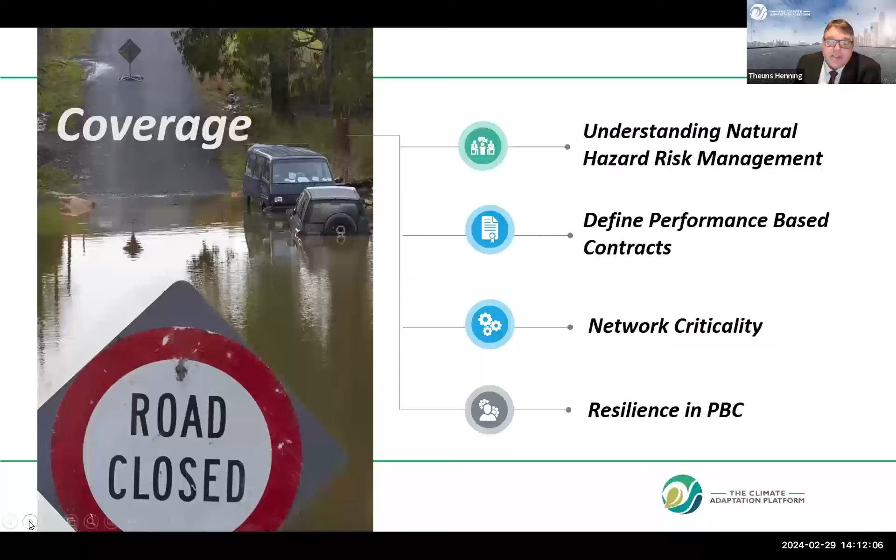Briefly define performance-based contracting. Ian is going to give you more substance in the application with performance-based contracting. I'm going to spend a brief moment on network criticality, given its importance tonight, and then focus quite a bit on how we bring resilience into performance-based contracting.

Our infrastructure in the context of climate resilience fulfills two functions. The first is for our critical infrastructure, the ones we depend on for basic services—we want them to come through storm events or natural hazard events relatively unscathed, so the community can keep on doing what they're doing.

There's also a second type of infrastructure specifically designed and built to protect us against impacts from storm events. A good example is retaining walls and those sort of things. Obviously, in some storm events, those things can fail and sometimes have got catastrophic impacts.

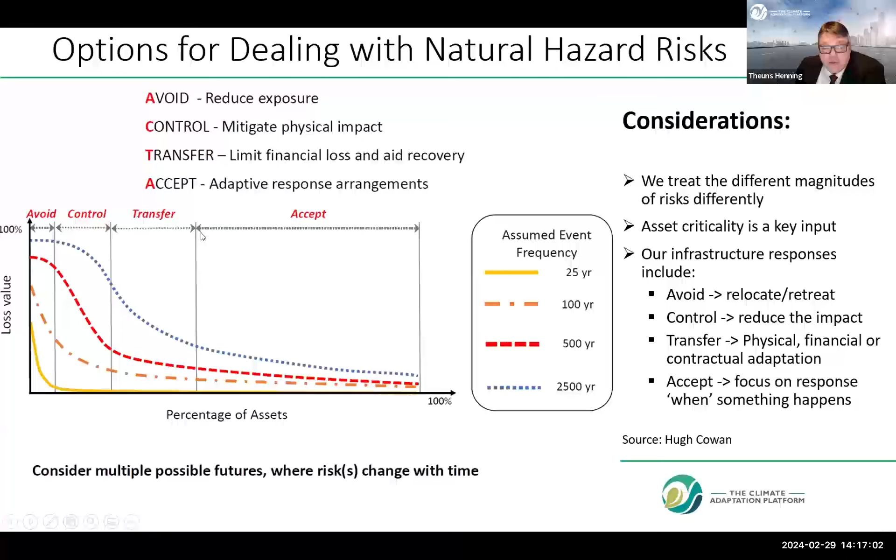Typically, the items with a quite significant return on investment from a climate perspective, we will invest money in that, and the other ones we'll perhaps look at transferring that risk. Most of what I'm going to talk about tonight will cover these two, with a strong focus on the risk that we transfer in a performance-based contract.

In any situation when we do investment planning, in particular constrained investment, which most of us is under, I haven't come across any road agency in the world that says we've got too much money or enough money. Most of us is short of cash. So what we need to do with the little bit of money we get is maximize the outcome, maximized across three areas as a minimum: the best return to our customers and our community.

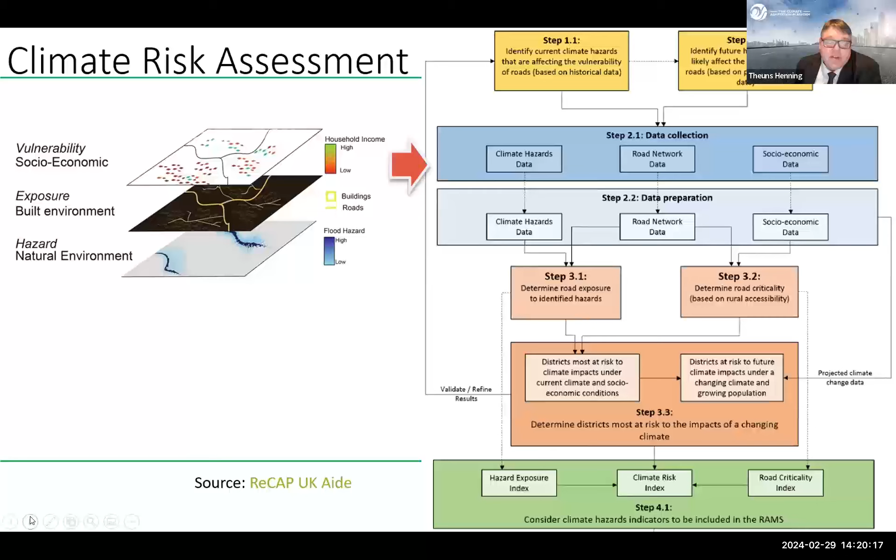We do the analytics to understand the hazard exposure and road criticality, and from that process we end up with an understanding of the risk index and the road criticality. From that point onwards, we can do the planning. At the start of any contract, or at the start of doing climate adaptation in any region, you need to go through this process. So it is quite universal.

Quickly on performance-based contracting, and as I said, Ian will go into this in a bit more detail. Let's start from this end. With traditional contracts, you tell the contractor what work to go and do. They execute the work, and as a consequence the roads may be in a certain condition, and because of that condition, your customer is going to feel or experience the road in a certain way - it may be smooth, it may be rough, and they may complain about it.

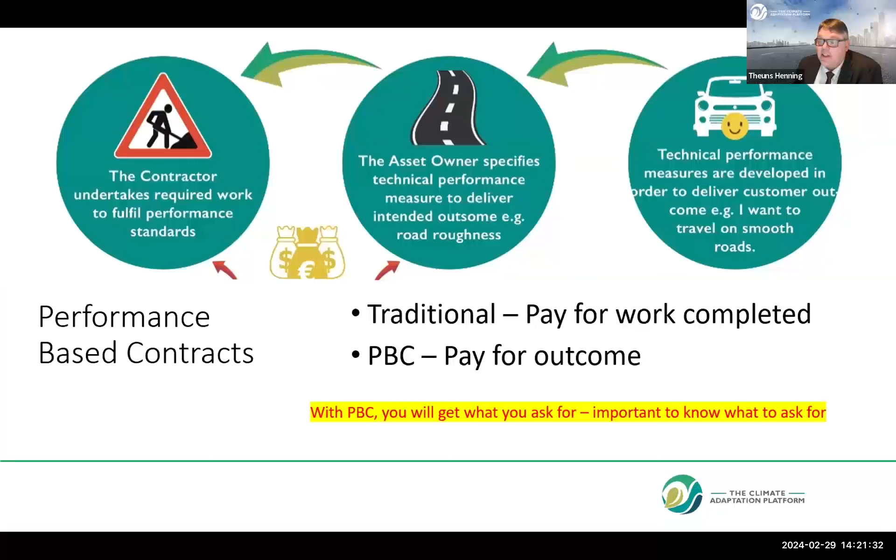With performance-based contracting, we go the opposite way. We first decide what do I want to give my customer in terms of performance level, and through that we specify what the road condition and situation need to be. Then we give it to the contractor and they decide how they're going to achieve that. The big difference is with traditional contracts, we pay for the work completed; with performance-based contracting, we pay for the outcome. The biggest advantage of performance-based contracting is you get what you ask for, and one of the biggest limitations is you get what you ask for. So the bottom line is make sure you know what to ask for in the first place.

I said I would talk about the 3 R's in resilience: robustness, which is pre-event, readiness, and resourcefulness, and then how we respond. All of this makes up how resilient a system is. Tonight you're going to hear mostly about resilience in the physical asset space - the resilience of the road network. But keep in mind, we also need to look at the resilience of a community, and the resilience of an organization to respond to events. Tonight we're talking infrastructure, and also the types of impacts.

In tonight's talk, we covered both the gradual changes in climate, so it's getting wetter over time, hotter over time, drier over time. We also talk about shock events, all natural hazards, so that includes earthquakes and weather events. And then obviously we get this bit in the middle that we have to deal with on our road networks.

So framing up the performance-based contracting, I think one of the most important steps, and even if your performance-based contracting doesn't go ahead, this planning and preparation part is perhaps the most important, because it makes you think what your network needs, particularly for resilience. So we will have a performance-based consultant that will do this preparation work for us, release the tender, and then the contractor comes on board.

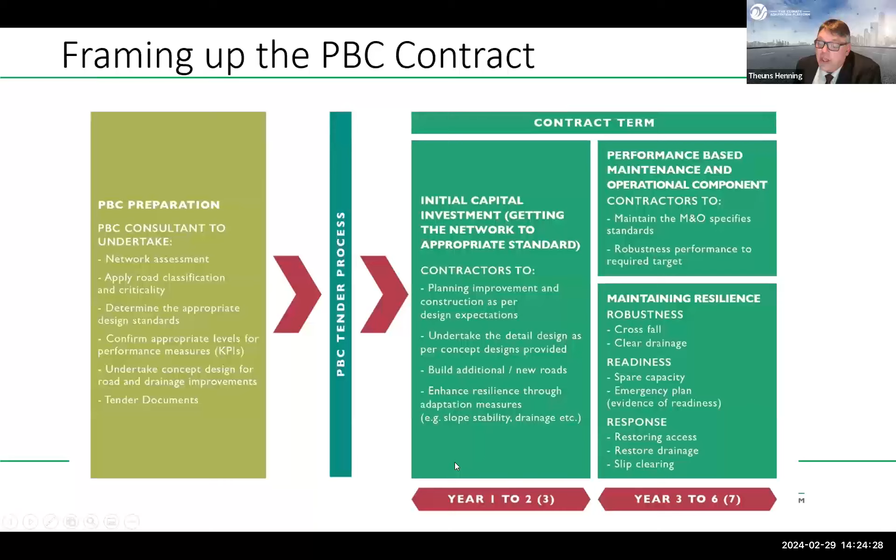There's ways to describe robustness, and I'm probably going to focus mostly on that. But there's also the elements of spare capacity. Perhaps if you've got a large unsealed road network, you need a few extra graders or access to a few extra graders in dealing with an emergency. And then, of course, all the response and rebuilding following an event.

So this is how we do it, and this is the whole concept. Now, I must give credit to Ian Greenwood, we have developed this framework. Ian, I cannot remember if it was over a bowl of salad or over a beer - maybe because we're both not vegetarian, it was the latter - but in any case, I have spoken about the 2 components in performance-based contracting, the design and construction, and then the maintenance and operate.

Now, when we bring in the resilience aspect, the whole risk element comes in. And there's a principle in performance-based contracting that you want to give some risk to the contractor, but not too much, because then you're going to start paying for them carrying excessive risk. So you've got to have a balanced position of risk sharing between the asset owner and the contractor.

So it's quite easy if the event is within the risk envelope specified for the contract. The contractor is responsible for all the repairs, except if there's damage due to extraordinary circumstances. And there's always some of those that you also have to recognize.

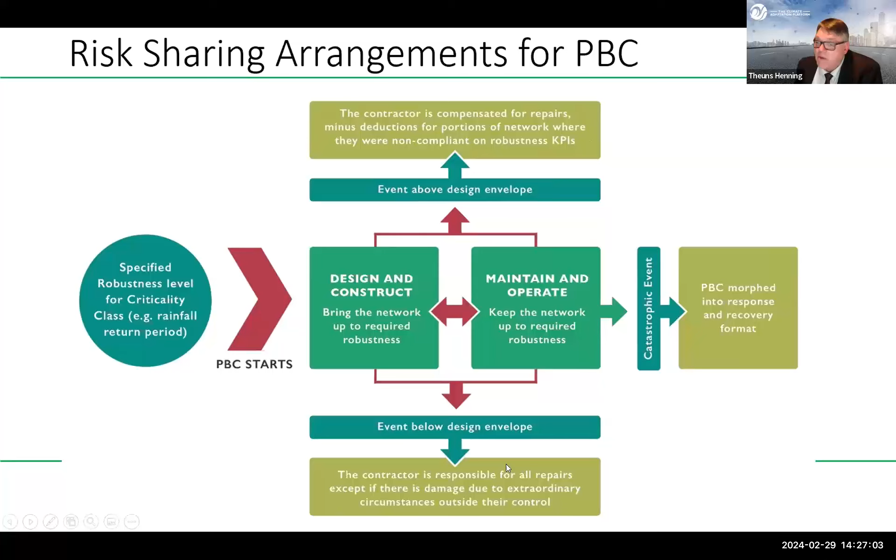And then the catastrophic events, when everything is up in the air and basically the contract disappears into the ether, there is the opportunity of using the contractor while they're on site and then morph the contract into a rebuild contract rather than a maintenance contract. So we've got very good examples out of New Zealand on that. I think Elke might touch on some of those.

For me, in the development of this concept, the hardest bit was perhaps to specify the cut-off points and criteria for when a storm is a certain size. I think, like anybody else, I gravitated towards a return period until I realized how difficult specification around return periods is, because return periods don't always quantify the ability of a storm to cause damage. It depends on where the eye of the storm is, the catchment characteristics, and all of those things. So with my hydrology colleagues, we came up with a process of saying you've only got to specify boundaries in terms of things you can measure.

You can measure temperature, ambient temperature, road temperature, rainfall. And for the downflow areas, you can install basically a flow depth meter in critical positions in the network, and you can quantify that storm intensity quite beautifully.

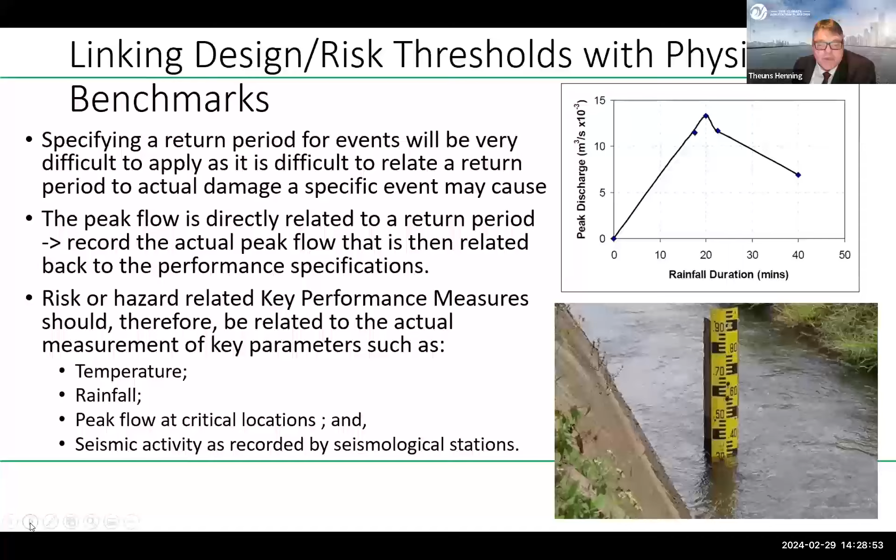About 5 minutes there, Theuns. How long? About 5, 5 minutes, I will make it.

Then road classification, quite important to take functional and hierarchical road classification, where we've got motorways on one side, free-flowing, limited access, to local roads, and we bring in the criticality lens. Now just two concepts.

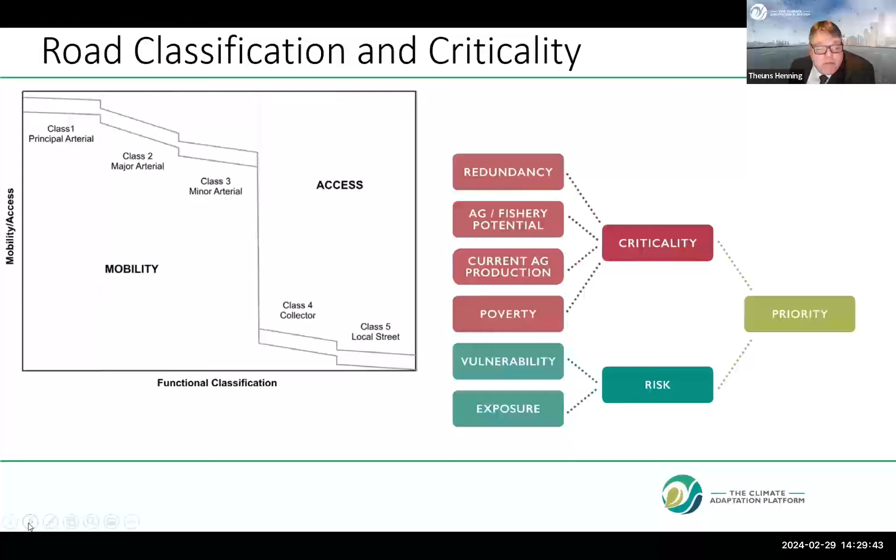Criticality talks about what the issue is that we try to prevent, so it's the downstream impacts. Climate risk is the vulnerability or fragility of the infrastructure and how exposed it is. Now those two give us the priority, so criticality is very important in planning network resilience investment.

There's an example of typical road criticalities that you can define, with a description. We've got the low impact criticality road network on this side, where we'll do very little to no additional resilience requirements, versus the supercritical stuff, where we've actually got to focus quite a bit on the resilience.

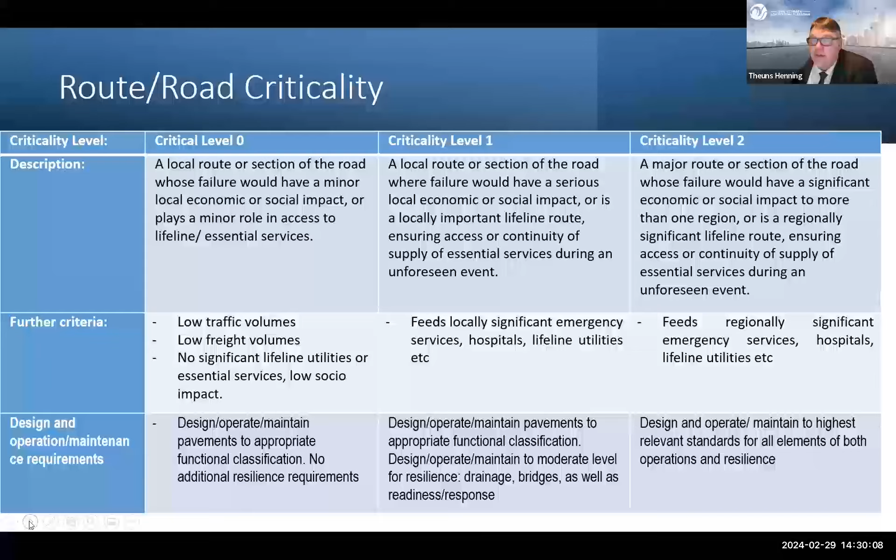You also need to understand, before you go into the contract, what can go wrong, and what you should do about it, because ultimately these are the things you want to incentivize the contractor to do. So you want to understand that before you'll be able to define performance specifications.

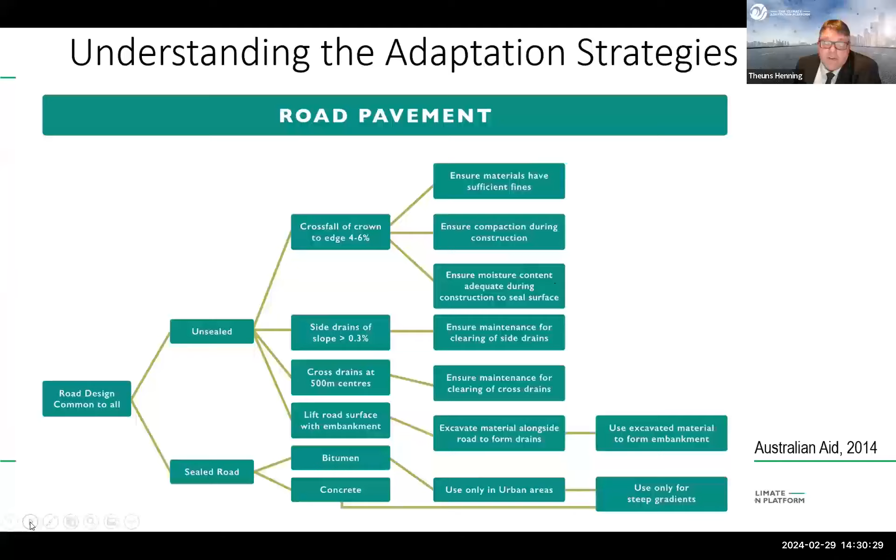And here's a good example of performance specifications. We look at the weather impact, we see what it can do to our roads and related infrastructure, and then what do we need to do in terms of our contract? What sort of behavior do we want to encourage? Ian has got a classical one-liner that he will talk about in ensuring there's routine maintenance always taking place.

I will leave it to Ian and not steal his thunder.

Here are some examples of performance measures, both operational performance measures and key performance measures that we can use in the resilience space. For example, with bridge structures, we want to make sure it's structurally sound, hydraulically functioning well, there's got to be no debris, and also limit the defects over time with conditions.

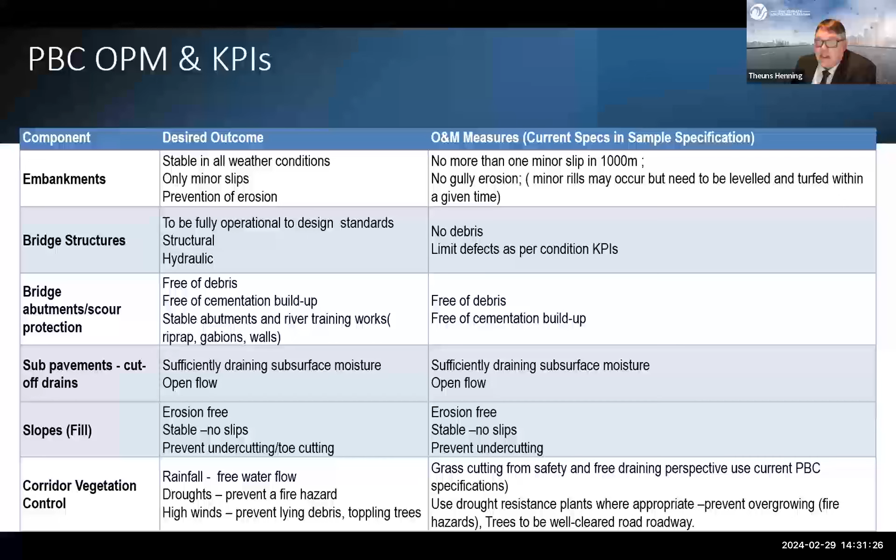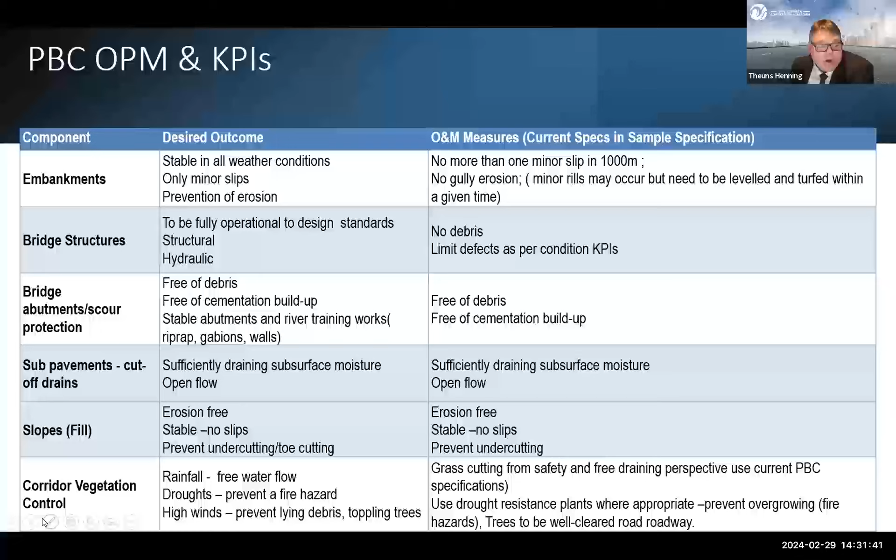Just a side note on bridges, also make sure upstream, and especially in forestry areas, Elke will show you some devastating damage that happens once the timber washes down and blocks the bridge flow paths.

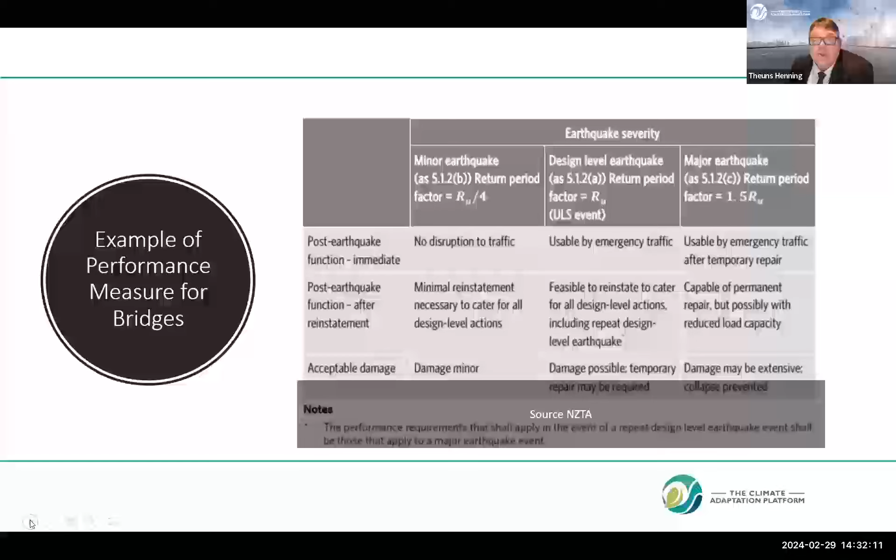Just in conclusion, my key messages: we always think that resilience is too expensive. I disagree with that. I think you cannot afford not to do resilience. There's a lot of low-hanging fruit, routine maintenance being one of them. Performance-based contracts can be a very effective vehicle for adopting good asset management and good resilient asset management.

Points to remember: target your investment decisions, and it must be balanced in what we want to agree on. Risk transfer needs to be considered, which is going to be the risk that the contractor carries, typically the party that manages the risk. Blanket risk transfer is very costly, and then have clear KPIs and OPM measures. And always think, what are you going to do about the things you haven't thought about?

So those blind spots, and they will always be there. Believe me, every storm event that I've experienced had some of those unexpected outcomes. So you need to also think about how you will deal with those in the contract.

I'm going to take questions later. At this point, I'm going to hand over to my colleague, Elke Beca. Elke is originally from Wyoming, in the United States. Fortunately, she came to New Zealand with her parents, and she did engineering science at the university where I'm teaching, and has made a remarkable impact on asset management in this country. Elke, it gives me pleasure to hand the floor over to you.

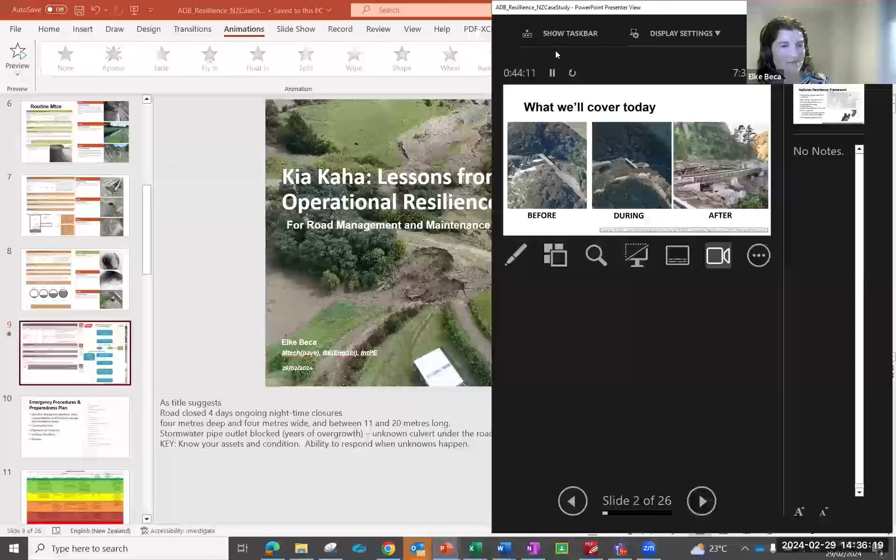So today, can I just check, is my screen sharing? Not yet. You haven't shown it yet. Okay, apologies for that, forgot to click the little last button. There we go, is that better? We've got your presenter screen on it rather than the presentation. So if you go up to that display settings, I think you can switch. There we go, is that better? Perfect, lovely, excellent. Okay, apologies for that.

Okay, so today, covering off again at an operational level, looking at before, during, and after, and aspects that we can take on the ground to help make our networks more resilient.

This is an example from Cyclone Gabrielle, which devastated the New Zealand North Island East Coast just about a year ago this last week, showing our nice network beforehand. This bridge, the Arapanui Bridge, a lifeline route between two fairly significant communities of Napier City and Gisborne, was entirely wiped away. And then after, the reinstatement of a Bailey Bridge as an interim response to our final rebuild.

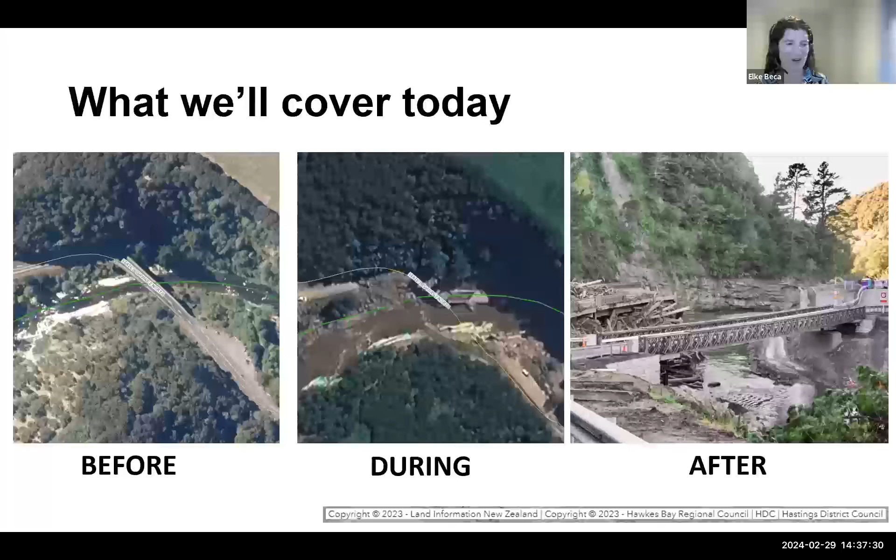So with those three lenses in mind, I'd like to start at the top. Theuns has largely covered off this space of how do we prepare ourselves for resilient events.

A tiny bit of context before I jump in, given I will be talking in a New Zealand context. In New Zealand, our road networks are owned and funded through our central government and local governments, so we have very limited private funding on our roads. We have an overarching agency called Waka Kotahi, New Zealand Transport Agency, who own and are the stewards of what's called our state highway network, which carries about 50% of our general traffic. The other 50% is carried by what are called local roads. So in this presentation, I'm really talking to our state highway networks and the approach of Waka Kotahi, but I'd like to hope these principles and examples are applicable right across New Zealand, and hopefully for many of you, have some bearing as well.

So we do have a national resilience framework in place, and it has been developed along the principles that Theuns stepped through, really focusing on those high impact, low frequency events.

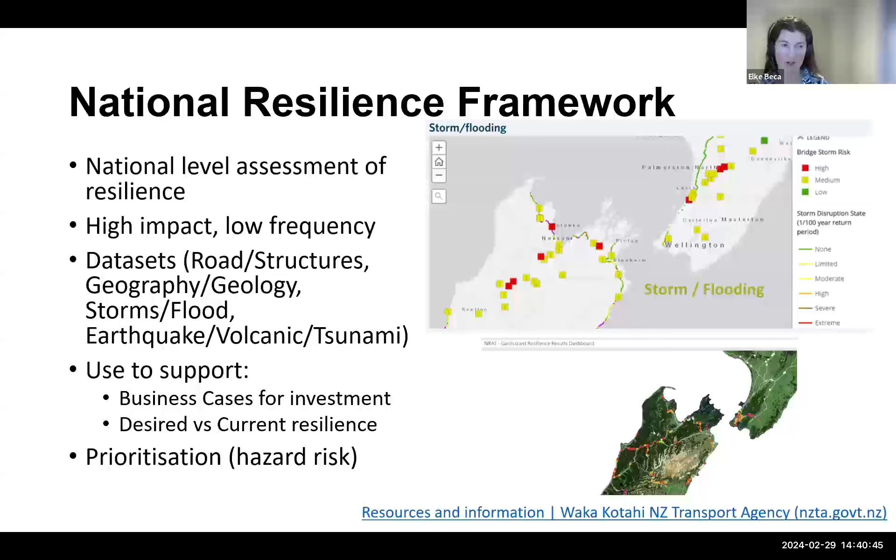So we've arrived in a fairly good position now across the state highway network that we can understand where our improvement money can be spent. But renewing existing assets or building new assets with more resilience can be prohibitively expensive. We all know there's a limited amount of funding, and there is absolutely a funding gap between what we would like to do and what we can actually afford in eliminating the hazards.

As a result, engineering controls such as this example, the trigger action response plan, are used to give us a more cost-effective temporary alternative to actually investing in renewing or new infrastructure.

So what the TARP is, is a plan identifying the trigger, which again Theuns has indicated in his presentation, which talks to the level of risk that we can take, the actions, so the steps taken before and during an event to address that risk, and the response, so what happens following the event to bring the infrastructure back to an acceptable level of risk.

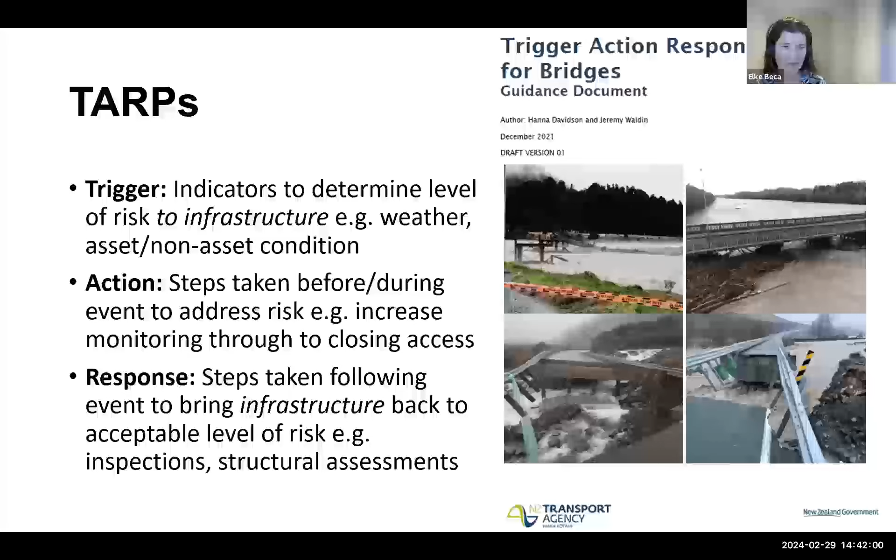So looking at a TARP on the ground, this is an example for a river flow rate. Similar to Theuns' example, looking at the flow through the river, identifying different statuses or kind of traffic light colors, so that the teams on the ground have a detailed description of how to respond as an event is approaching - in this example, a rainfall event. So we can understand at different flow rates what action needs to be taken.

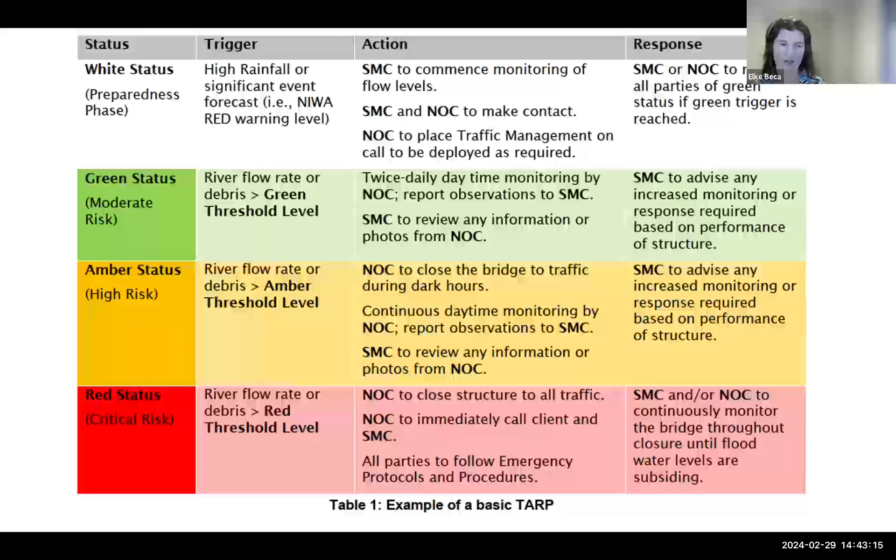There are lots of acronyms on this chart, so apologies for that, but they relate to different parties involved in the maintenance and management of the network. So there's a very clear description of at what point in time, what trigger, what action needs to be taken, who needs to be informed, and what the response is following that event, so that we've got a documented process to help inform how we deal with events as they arrive and start to impact our networks.

So moving a little bit more into that routine maintenance space and actions we take at a local operational level, this is an example out of our network contracts, which are rolled out right across our state highway network. Theuns also spoke to the importance of operational performance measures, so getting out and ensuring that regular maintenance is undertaken.

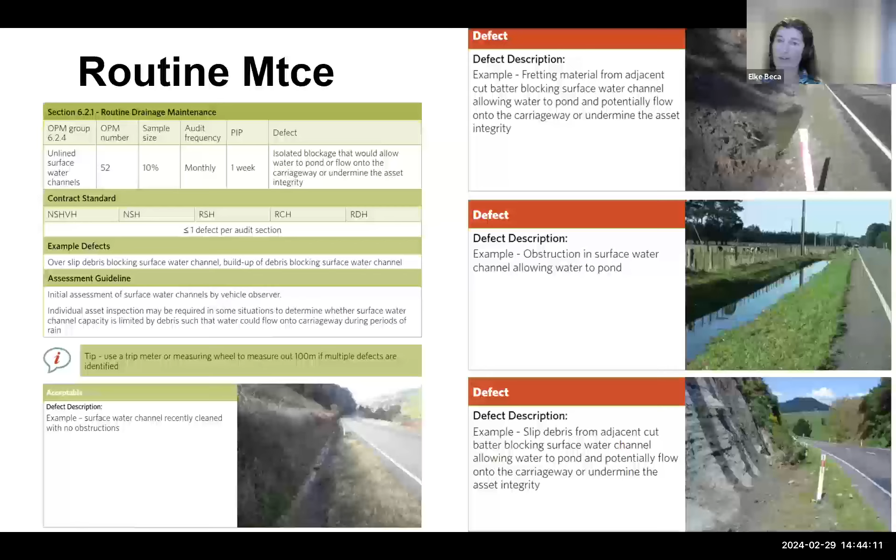So across our networks, we do have operational measures relating to our drainage infrastructure to ensure that they're inspected and cleared in a regular manner. These are just a couple of examples - this is looking at our side, our unlined water channels, of which we have a monthly audit frequency to ensure that they're cleared and cleaned.

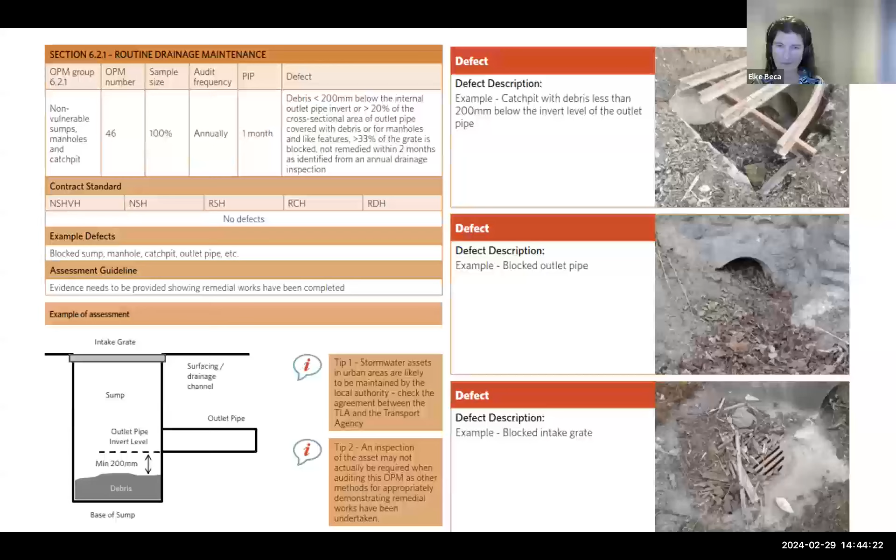Sumps, manholes and catch pits on an annual basis. Our culverts as well - whilst we do have a continual cycle going around our network, the expectation across our state highway network is that on an annual basis, every single culvert will have been inspected and cleared to the level of service required.

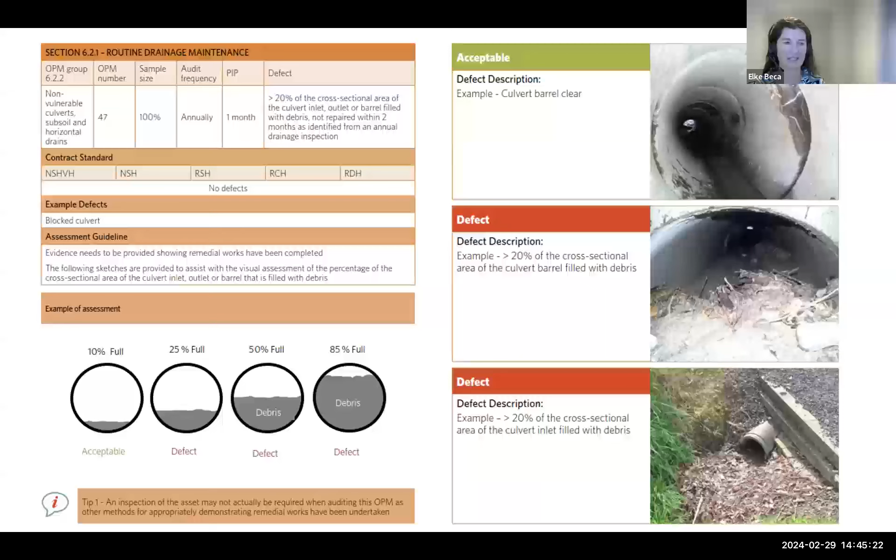And I guess, as we all know, there's no guarantee that just because a bit of infrastructure like a culvert has been cleared, it's not going to be blocked the next day. But knowing that it at least has been identified, located, and action has been taken is really important to have embedded in your contracts. It's astounding, even in New Zealand, with the data that we have available, the number of bits of infrastructure like culverts that we are still finding on our network that we weren't previously aware of. So data becomes really, really essential.

And finally, the criticality aspect.

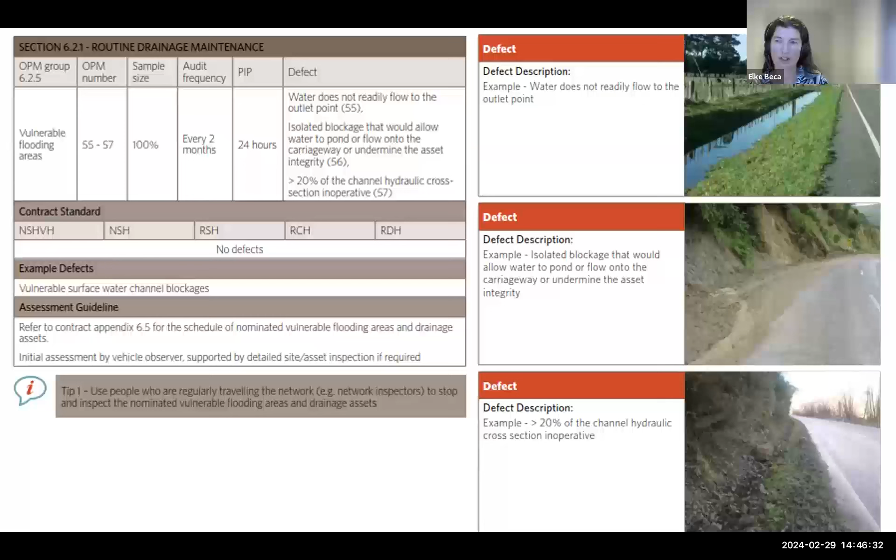Through our prioritization of understanding our network, we can pinpoint where our vulnerable assets are, and on those vulnerable assets implement a more rigorous inspection regime. In vulnerable areas with vulnerable infrastructure, we have a much more rigorous response and also lean on the trigger action plan, so when an event is coming there's an action in place to get out and inspect those vulnerable bits of infrastructure in advance, where we have time. That means in the areas we know are most vulnerable and most likely to be impacted, we can advance or speed up the typical routine maintenance that would otherwise occur, ensuring the best bang for buck and best opportunity to keep our networks open and resilient.

This diagram on the right-hand side is part of the emergency procedures and preparedness process for our vulnerable flood sites.

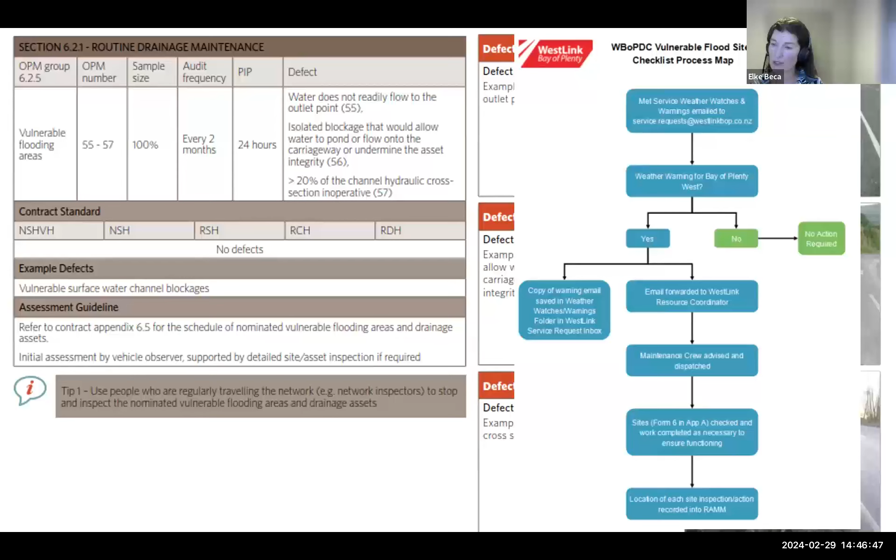Stepping into that next space, a very key document when we get to managing events and post-event is having a plan in place that identifies who is involved, what their roles and responsibilities are, so the operational team can effectively manage events as they come on board. It talks to the communications, the operational processes, checklists. The preparedness plan has detour maps in place so that we have a concise plan with all of the key information for the range of events that may hit our network, ensuring consistency at an operational level in how we deal with events.

This has been a really key improvement we've seen across our networks over the last few years, getting consistency in how we respond to events and hazards.

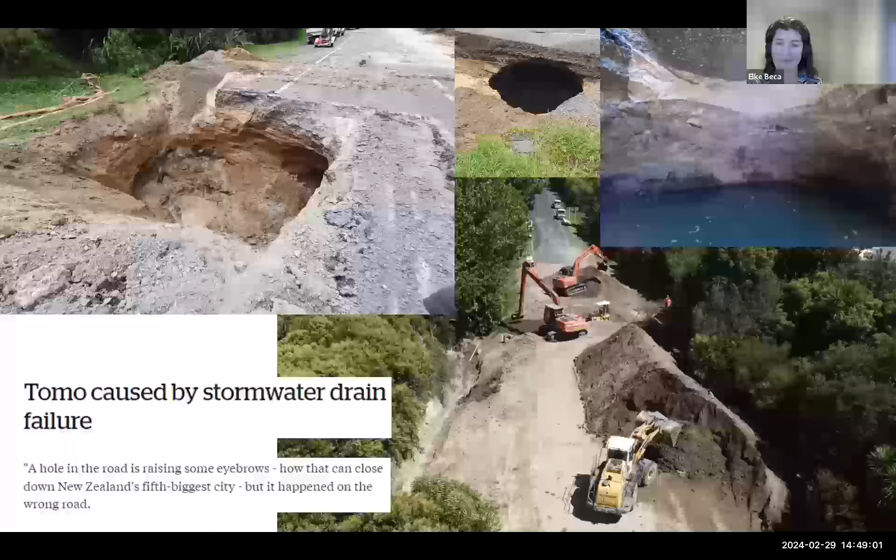The EPP plan is a really key document that all networks should have in place to document the emergency response process. This is an example close to home here in Tauranga, a network that services our fifth largest city in New Zealand.

Unexpectedly, this happened literally a couple of weeks ago. A little hole on the side of the road appeared, and what was discovered was a tomo - an entire cavern filled with water right across the breadth of the road.

The key takeaway was that despite all the measures we have in place and the management and maintenance we carry out on the network, there was a culvert under this bit of road, and also a stormwater pipe from the utility sector that had ruptured and over the years had just carved out a cavern, which unbeknownst to the traveling public left merely a 200 mil bit of asphalt over top of an entire cavern.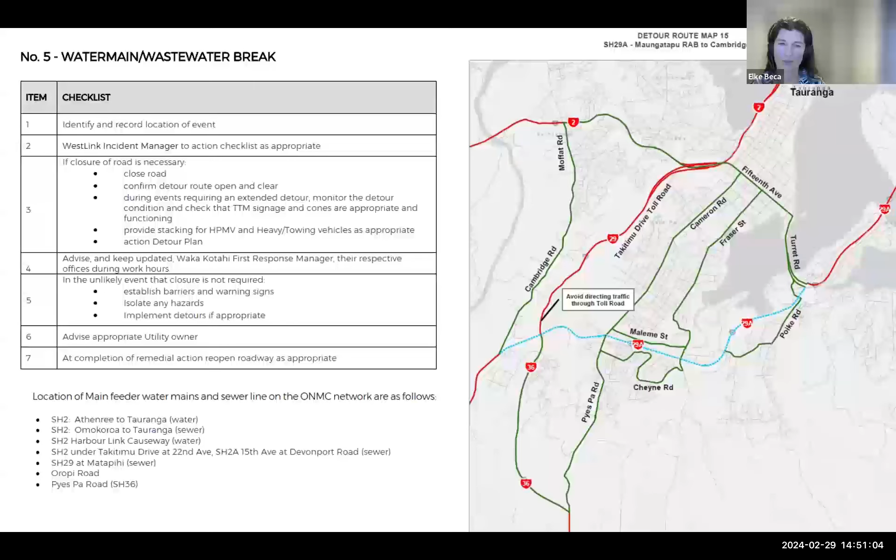What was fantastic with the response, once this was identified, was the clear ability to close the road, get detours in place, and have contractors on site, with resources identified in terms of material sourcing and remedial action through the plans that were stood up. For something that could have been absolutely catastrophic, the response and turnaround was exceptional. The communication to the public was well carried out, which made what could have been a catastrophe turn into quite a straightforward process - there was a five-day closure. This is an example snapped out of our emergency preparedness plan that was put directly into action as soon as that incident was identified.

Another case. Five minutes, yeah.

Okay, great. Another case study was around a cyclone which hit just prior to Cyclone Gabrielle and took out the road network to one of our beach communities. This case study really emphasized the importance of having access to local resources in an emergency event, and having contracts in place that enable quick and well thought through responses without having to go through significant procurement to get action underway.

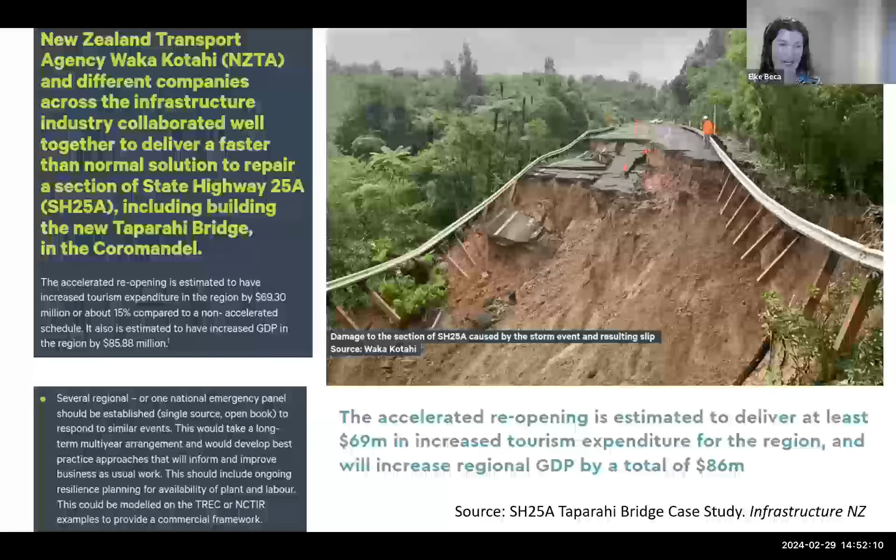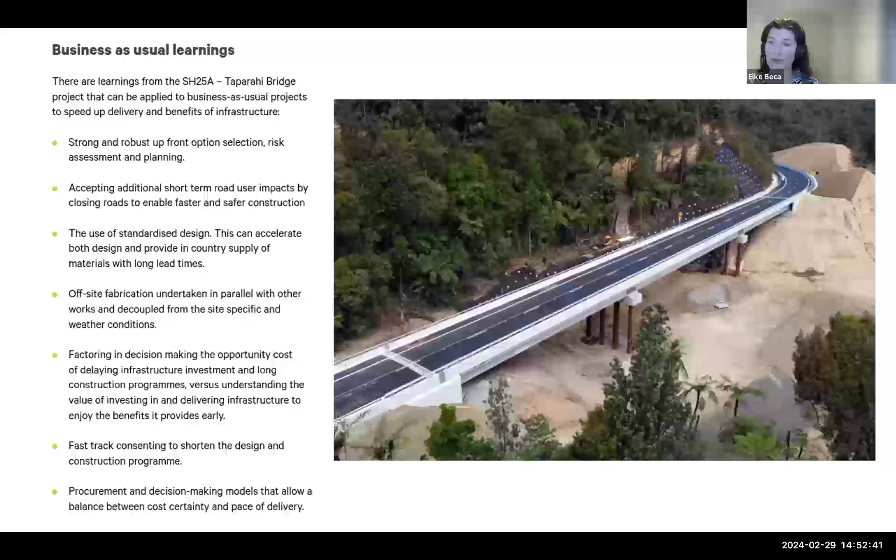What was pegged to be a 3-year repair was able to be delivered in less than a year, saving significant money and pain for the traveling public. One of the key learnings: fast tracking of consenting to shorten design and construction, parallel construction of the infrastructure alongside the design, using standardized design, and ensuring access to local materials to advance the response.

And the final piece is looking at our Cyclone Gabrielle.

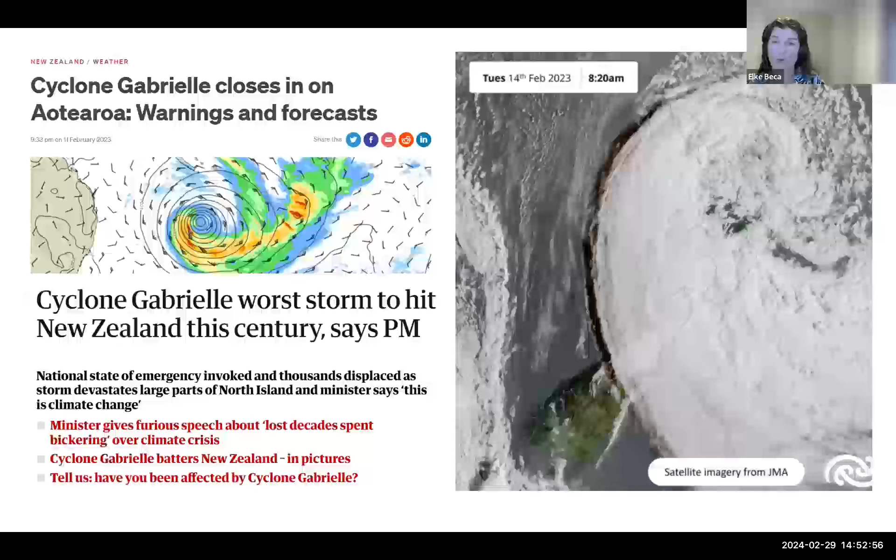So almost a year ago today, Cyclone Gabrielle hit, which was pitched as the worst storm to hit New Zealand this century.

This was a level 5 national state emergency that has only been declared 3 times in New Zealand. Rainfall was well beyond the forecast and previous recordings, with over 400 millimeters in some catchments, with winds over 130 kilometers.

Stop banks were breached in 22 locations. The heavy rainfall caused extreme flows and a number of bridge failures right across the network.

In total, we had 30 bridges collapse, most which needed a complete rebuild. 25 bridges had significant damage or their approaches were washed out, and 86 bridges had moderate damage, impacting traffic to some degree.

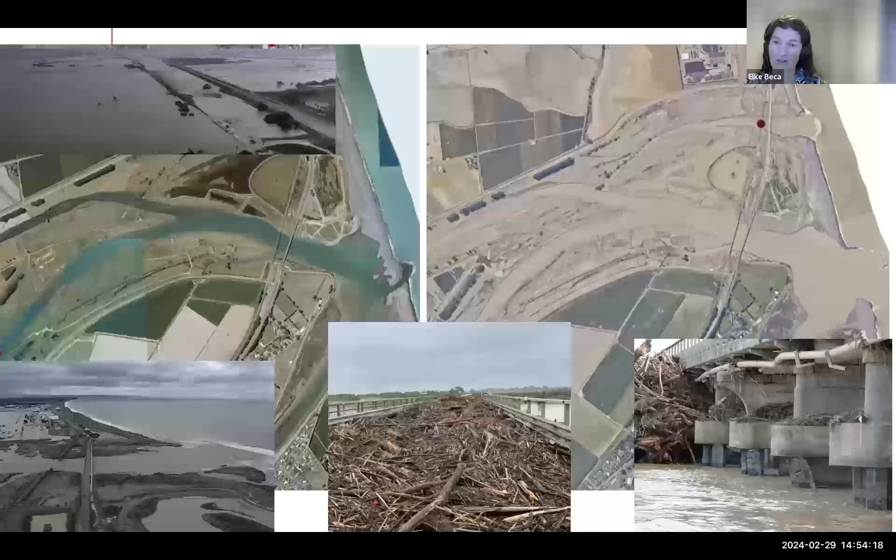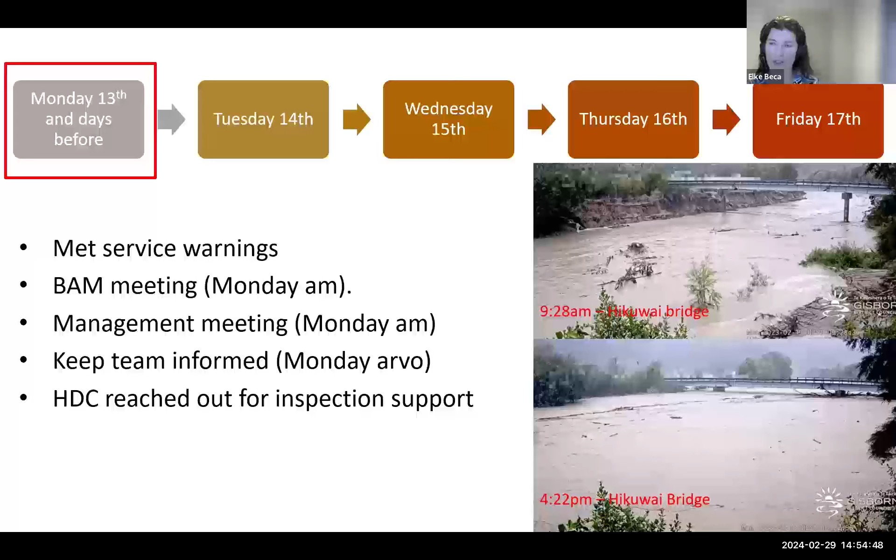So just stepping through the on-the-ground response, I guess what was really challenging with this event was it wasn't picked to hit this area, and there was minimal warning. The cyclone was coming, but it wasn't meant to be significant across the Hawke's Bay.

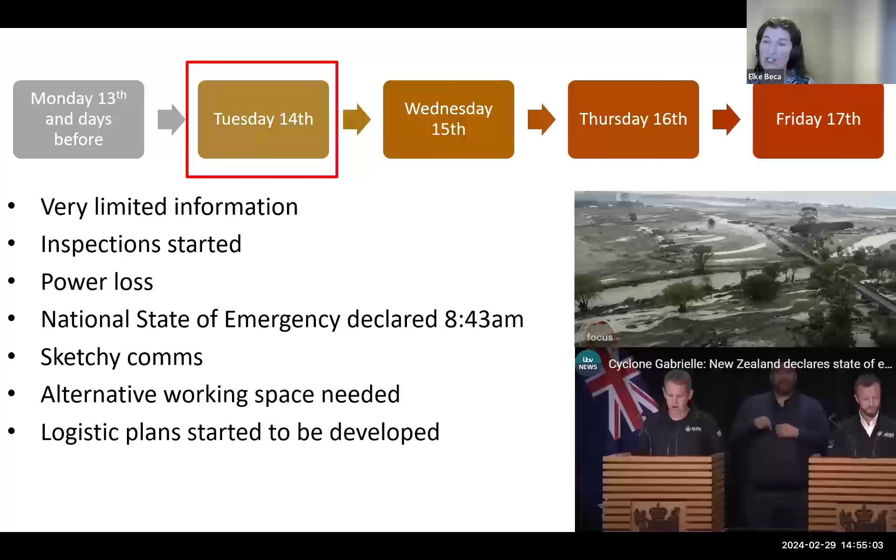When the event hit overnight, there was power loss, limited information, a national state of emergency was declared, and basically the emergency response team needed to pull together and make a plan. By day 2, the team had been pulled together and clear roles established.

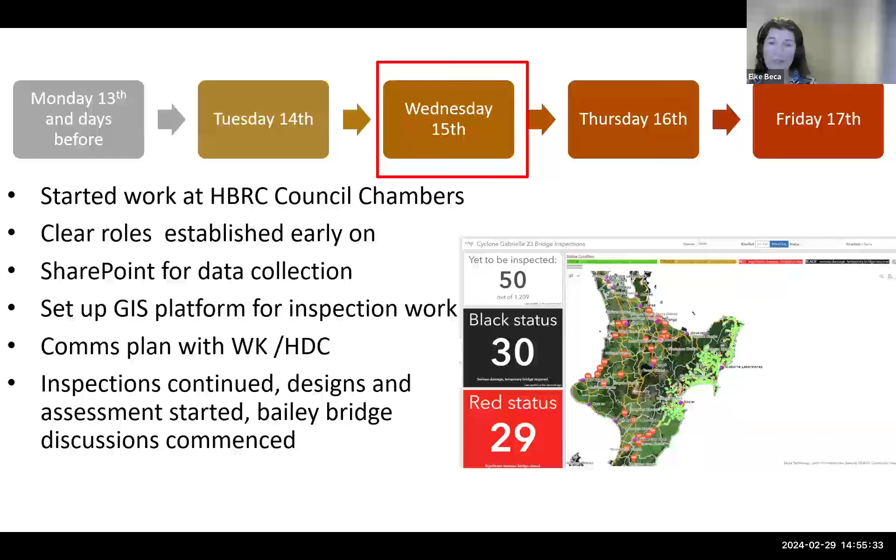Data was started to be collected, and in fact, in those first 3 days, the inspections on the bridges were already completed, and there was a clear view at a local level of the damage on the ground. That became really, really essential for starting that emergency response for restoring access back to the communities.

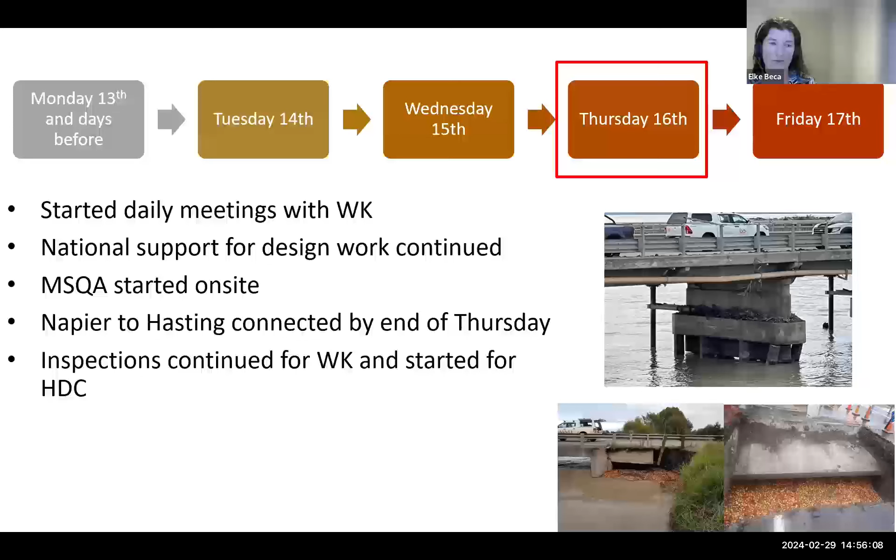Within that first week, the enormity of the situation hit as comms started to come back online. So the first week was paper-based and handwritten meetings, because there was no connectivity, bridges were out, no power or comms were available. So very, very challenging situation for the teams to deal with.

So in terms of learnings and what that team, in a really quick summary, have kind of taken away: establishing defined roles and responsibility within the team really early on is one of the keys to success in this response. The collaborative approach between the clients and contractors and other consultants enabled the effective sharing of information and that common understanding of what the status of the situation was.

Being able to implement appropriate technology and a shared data space again really helped with the sharing of information. In this space, there were multiple contractors, consultants, and asset owners involved, and getting that single source of truth for information when comms were down became a really essential component.

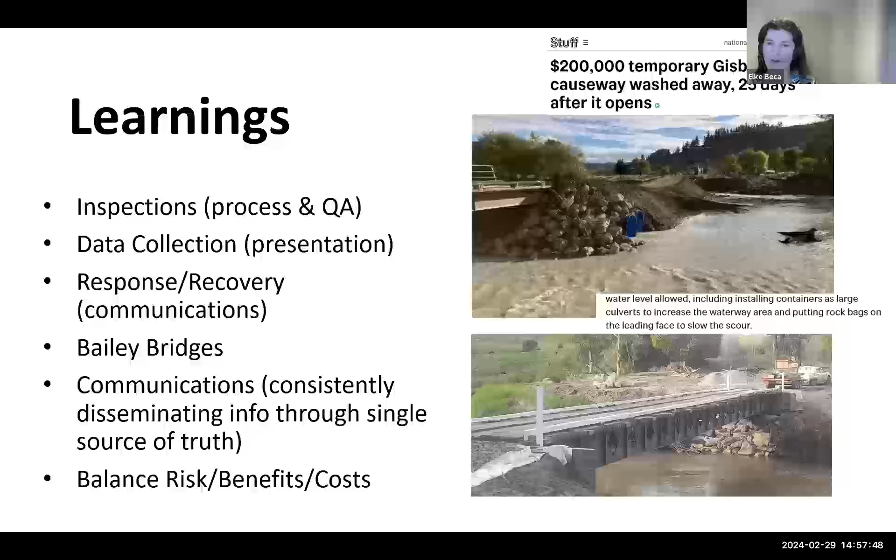Designing an intelligent triage system allowed the ability to communicate effectively for different purposes. Those pre-existing contractual frameworks really helped to mobilize resources that had historic and legacy knowledge of the network to really get action on the ground straight away. So communication was the key outcome to the success of the response in Kaikoura.

So just wrapping up, I know I'm in the last minute or so. Before events, being prepared - those emergency preparedness plans which help to detail the communication and parties involved and how you respond when an event hits - data and access to that information to inform where to prioritize your time in advance of an event, particularly in that maintenance space.

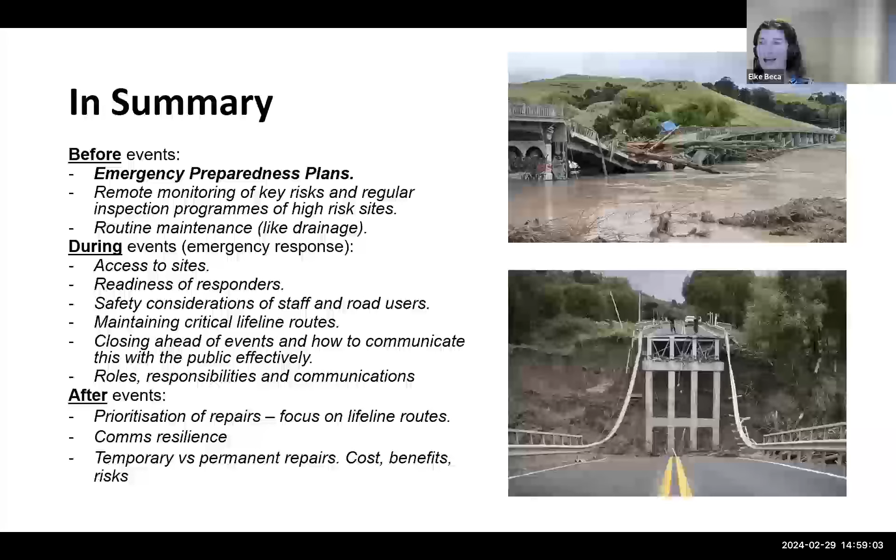During an event: getting access to sites, readiness of responders, safety considerations, maintaining the lifeline routes, and roles, responsibilities, and communication. We're well and truly still working through the aftermath of Cyclone Gabrielle, and it will be many years before we're out of the woods, but the response has been outstanding to date, and our ability to reconnect communities has been a testament to the teams involved.

So I'll just close with a story. You can click on this link to have a look through a storyboard of a different event, which draws in the importance of data and how data can be used to improve our ability to respond to events. All right, thank you.

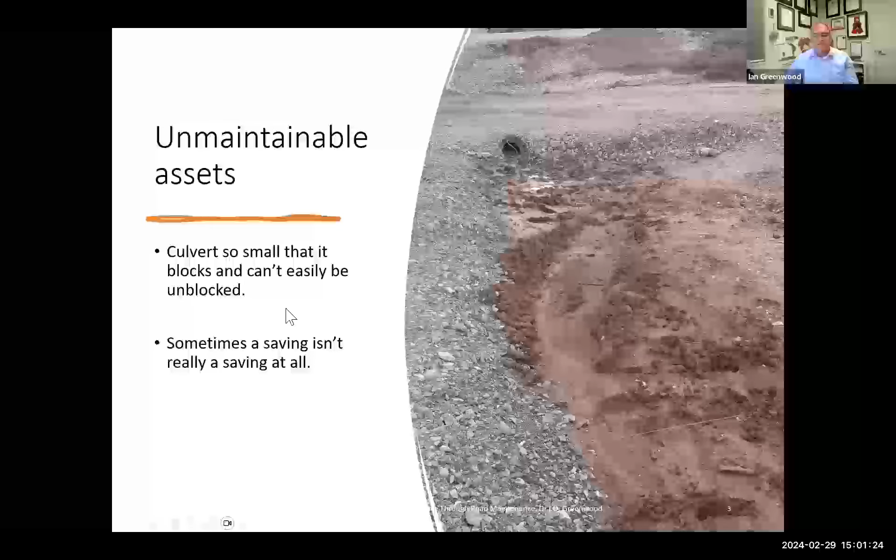So first of all, hopefully this is flicking through for you. The problems we see, first of all, are unmaintainable assets. Some of the challenges from a maintenance point of view are that we get culverts put in that are so small they block easily, and also can't be easily maintained. So it's like we've saved a dollar on construction, but ended up with a situation where that dollar becomes a blocked dollar and wasted right from the start.

We also have situations where we might have a maintainable asset, but it's not being maintained. The message I see out of some of these is that a climate resilient society is more than just the road network. We need to look at the role of, for instance, litter disposal in many countries. We've got countries where there isn't the ability to handle household garbage, so it gets dumped on our sidewalks and into the streams and culverts.

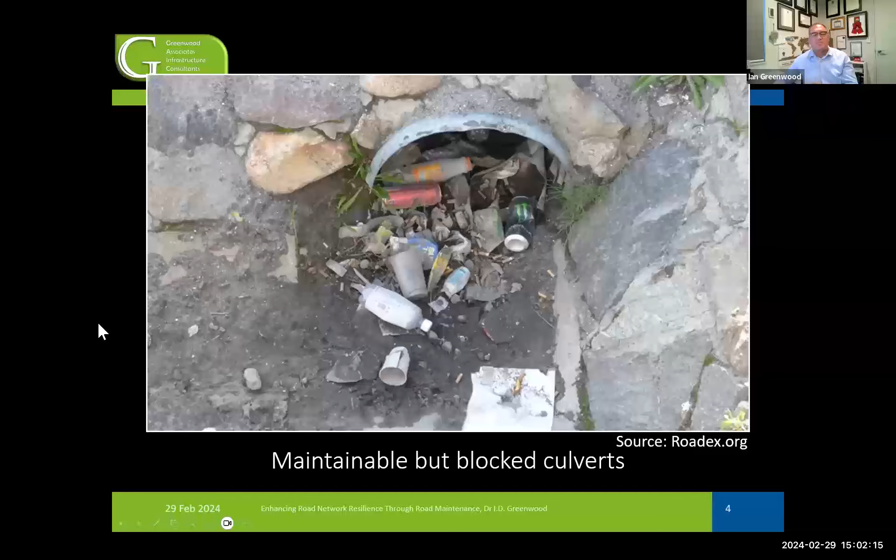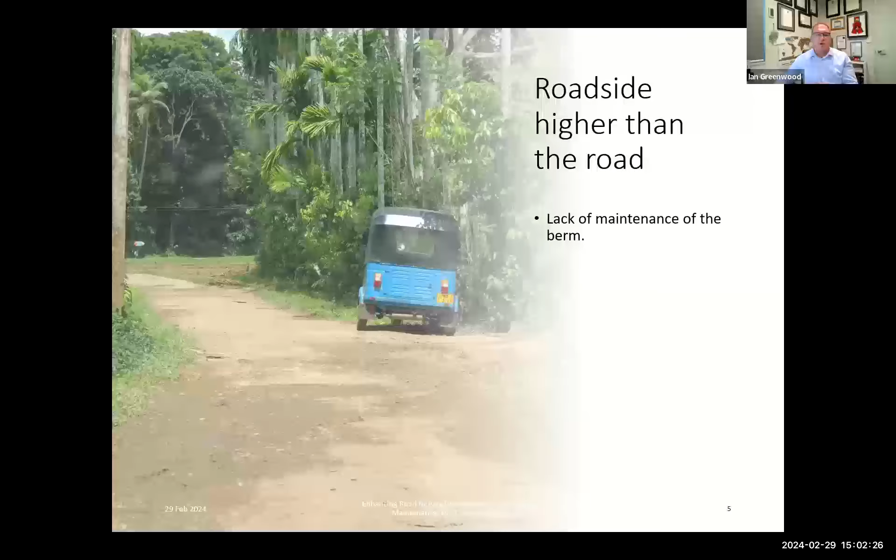And so we can't hope to create a climate resilient society or even transport system if we're not addressing these wider issues. Again, here's a scenario where the shoulder berms are a bit high, so the water ponds on our roads and softens them. This earth road is always going to struggle in a wet environment, but when the wheel tracks ahead of winter are already such that water sits there ponded in mud, we quickly lose our resilience. So are we actually doing the right work before the winter storms to give ourselves a chance?

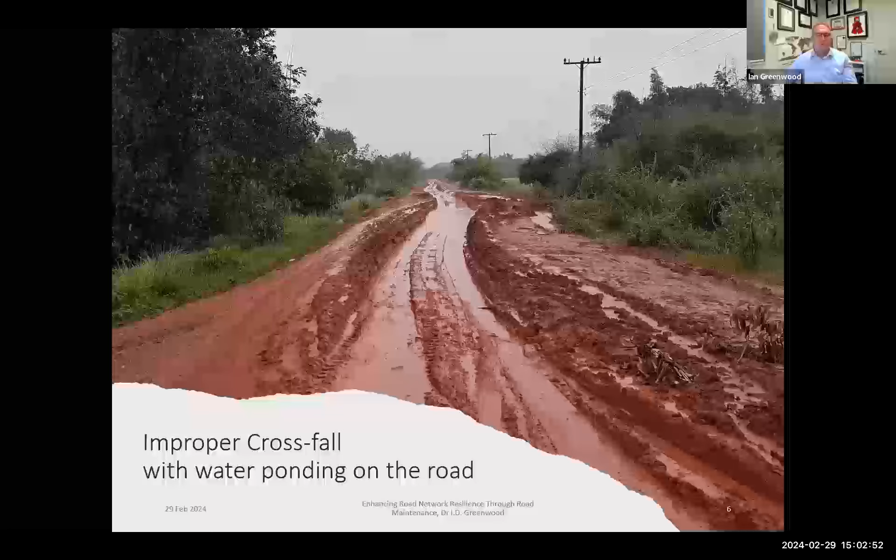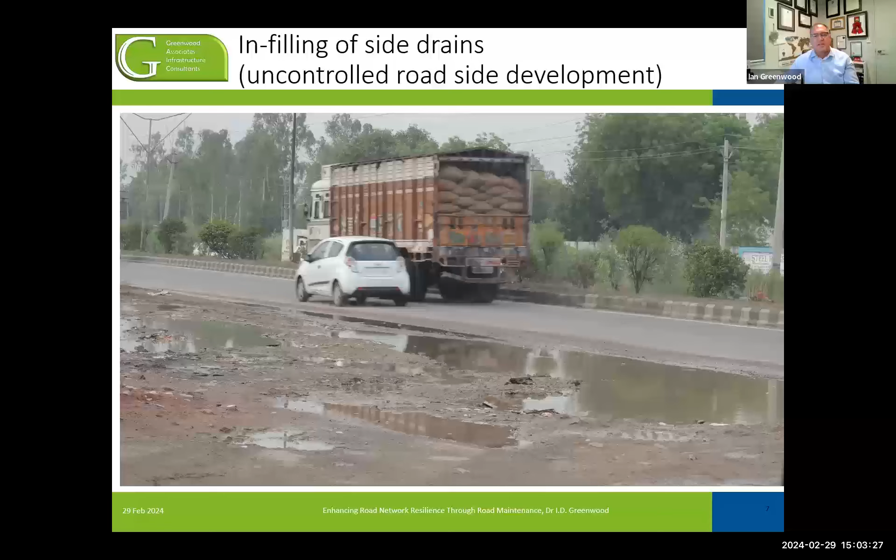Another issue is that ability to control what happens on the side of the road. Here, a well-designed road once had nice quality side drains, but then ad hoc development comes in - I suspect you've all seen it - and the side drain gets completely filled back in because somebody wants to build a house or shop alongside the road. We need to look at those controls if we're going to have a resilient network. It doesn't matter what we build, how big the drain is, if it's just going to be filled back in like this. We also repeatedly see private access ways come in and block drains.

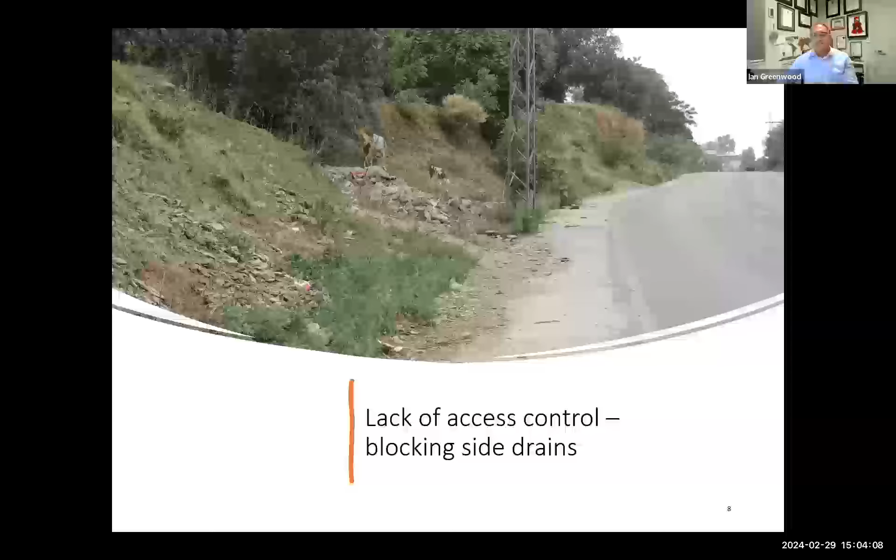We've got a bit of power infrastructure there again, right in a place where it impacts us. Now, I should say, I acknowledge that climate change and climate resilience is more than just about water - I've been dealing with permafrost melting issues in Mongolia and others. But I'll use the water issue because it's a simple one that I think the vast majority of us can readily understand.

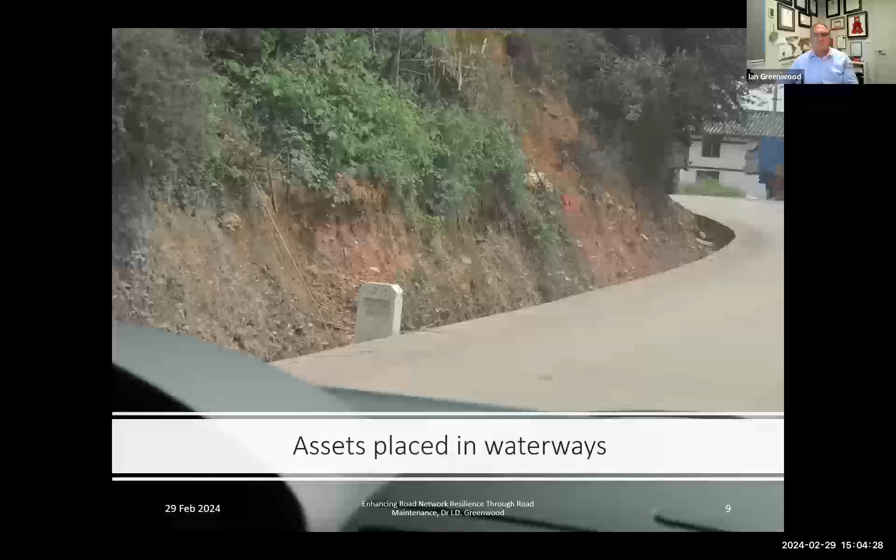Here again, good side drain, but then we've gone and put a big dam in the middle in the name of an edge marker post. So we need to get smarter. Again, a chain is defined by its weakest link, and it's the same here - we're building dams in the middle of our stormwater channels.

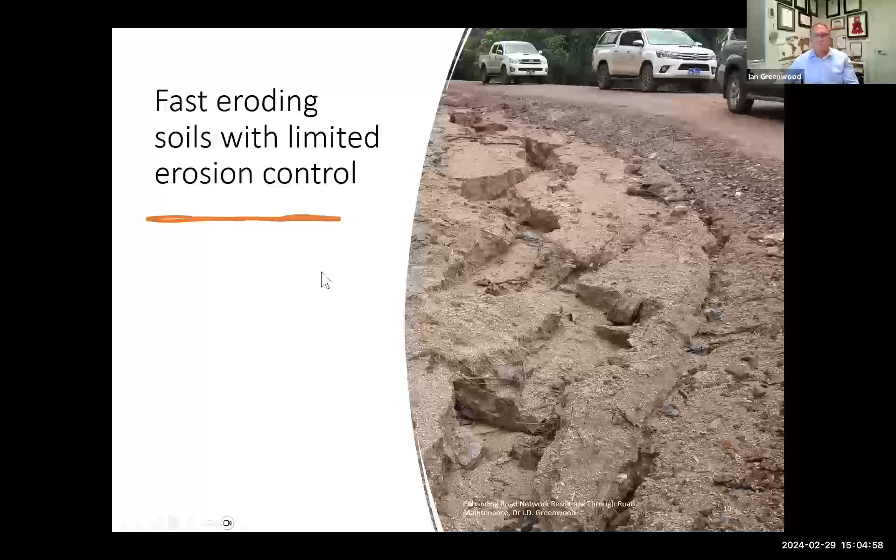Here, fast eroding soils - we don't have erosion control in them. So all of this material ultimately washes down and blocks the culvert. The culvert then gets washed out in the next storm, and we lose a road when we should have been addressing the sediment issue further upstream, getting in there to do the right rip rap or similar to prevent that from happening in the first place.

A huge portion of the world's network, and even here in New Zealand about half of it, is an unpaved network of gravel roads. Gravel roads need maintenance, they need that shape so the water runs off the road. A road like this, had it been graded up and down, you've sorted out the side drains, you've sorted out the camber of the road.

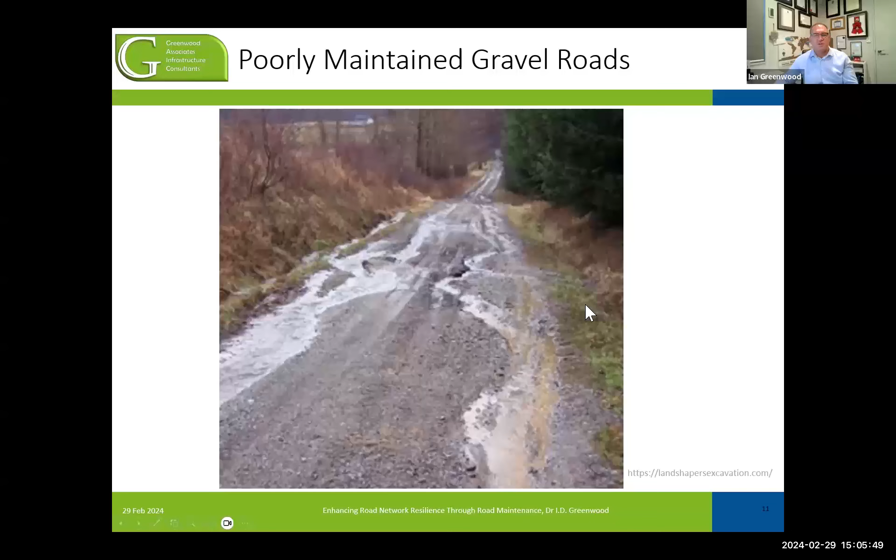But when you don't do that, you quickly get the scenario where the water runs down the road, takes the gravel, washes it into our culverts, and suddenly what could have been prevented with a very simple grade ends up being a washed-out culvert, communities cut off. So we lose our resilience just because we're not doing that basic maintenance.

And the good old chestnut, we've built all this infrastructure essentially to hold rubbish and debris, and we're getting no value at all out of it. You question, was it actually worth spending $1 on, right from the start? Are we better off to actually just leave these as open drains where there's a chance they would get maintained? Adjacent shop owners, landowners may be able to clean them, but when we cover them in large bits of concrete, we're actually creating something which needs better equipment and dedicated resources to maintain.

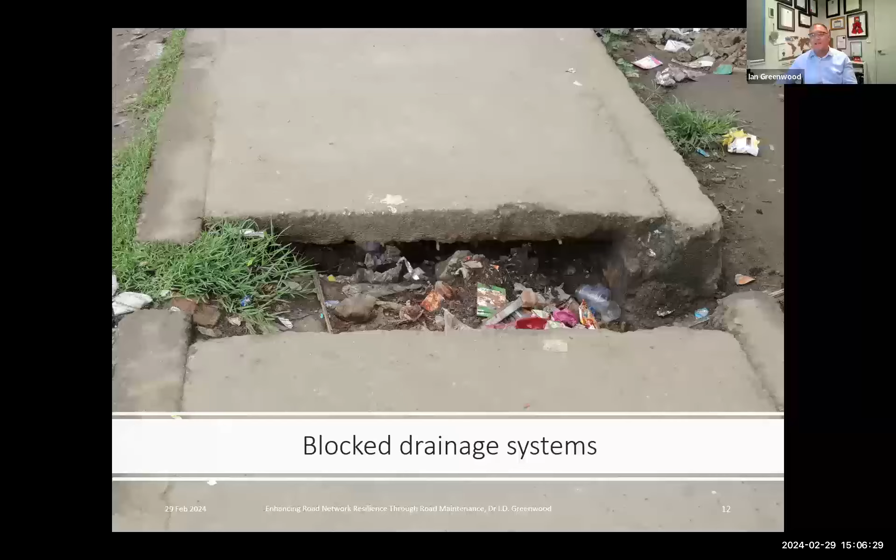So the consequences of that, if we look at it from the bank's member countries, a lot of our roads are not delivering the resilience they were originally designed for. A lot of them wouldn't even meet the climates of a decade or two decades ago. And here we are discussing what might be coming in the 1, 2, 3 decades ahead of us. But because we're not doing that maintenance, we haven't even covered off today. So we're getting further away from where we want to be because we're not doing the day-to-day activities.

I was involved in running the Auckland motorway network here in New Zealand for a number of years. We knew there were certain catch pits that filled up with leaf debris and other things more often than the rest. When there was a storm coming, we would go out and make sure those were clean. We didn't wait until the storm and then go, there's a pond on this piece of road, and then try and fix it. We fixed it beforehand. Really, the concern is that a lot of the resilience we've invested in is actually being lost from the network.

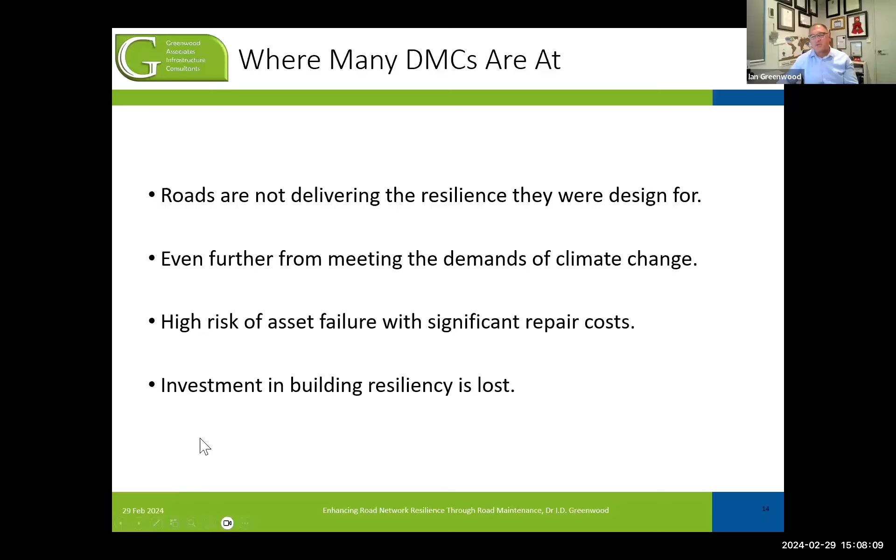So the causes, broadly looking at it, I would say there's issues of design, funding, and understanding. You can get away with being a little bit bad at one of those three. So if you don't have all the funds, but you've got good design and very good people in your maintenance teams, you can get away with it.

But what we see too often is we have substandard designs, a significant lack of funds for maintenance—that's routine, periodic renewal, grading and gravelling roads, etc.—and there's a lack of understanding of what's important. Sometimes it's a lack of technical understanding, sometimes it's political directives to be doing other stuff. I've been in countries where the maintenance teams are out painting the curbs, yellow and black or white and black, to make it look nice and tidy, yet the catch pits and the drains right behind them are blocked. So it's not that the money is not there, it's not being spent where it would do the best.

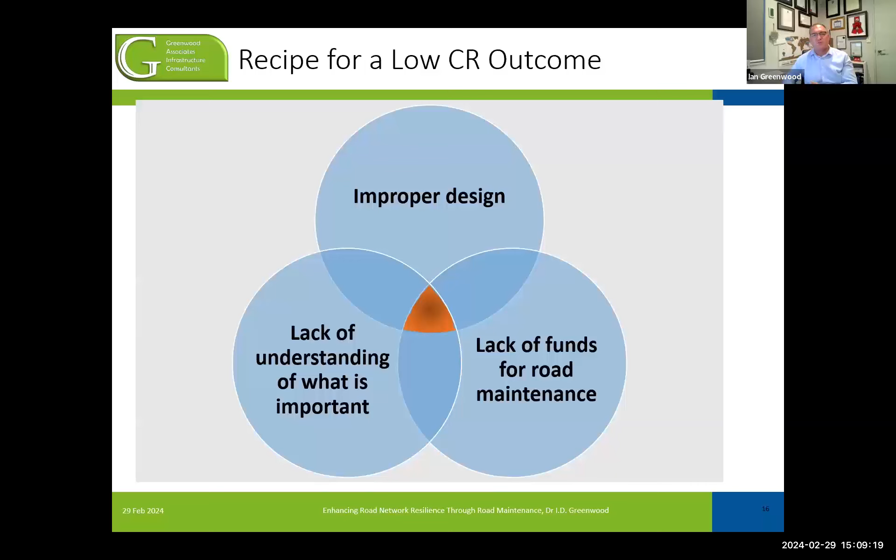Improper designs, if we look at that, it shouldn't happen, but we do need to look at our design standards. When were they last updated? In particular, do we have the right rainfall that we're even designing for? But importantly, bring your maintenance teams into those design standard decisions.

Examples all over the world: when I was in the UK, the drainage team came up with this really smart way to do new catch pits and drainage on their roundabouts—big, multi-lane roundabouts above their motorways and the likes. The only thing was, they didn't talk to the maintenance team, and the maintenance team pointed out afterwards that it was a smart plan, but they could no longer maintain them without shutting down the entire interchange. If they'd gone slightly different with the maintenance team's input, they would have had a solution which was both good from a design point of view, but also good from a maintenance point of view. So we can't just have designers designing stuff without that input on how to maintain it.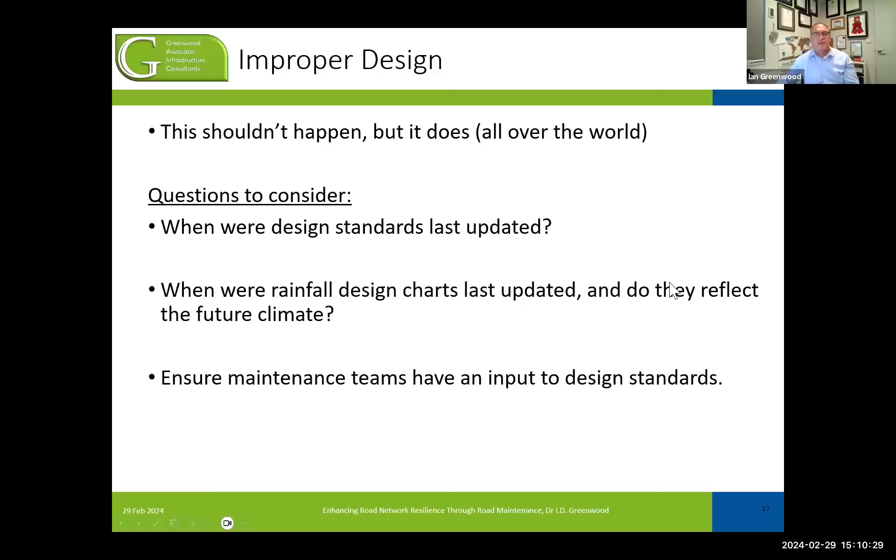Funding—very few countries don't have enough funds. Here's an example where this particular country is generating about $1 billion a year from its road network, from fuel taxes, vehicle registration, tolls, etc.

The maintenance needs of the network are about a third of that, so less than $300 million. But what they actually get is about $87 million—less than 9% of the money coming in for roads actually hits the road to keep it in good, resilient condition. So it's not an issue of whether there's money, it's a case of whether it's being spent well. This country is spending hundreds of millions of dollars a year building new stuff, but not spending a little bit more to look after what they have.

Going on with that priority issue, we need the mindset that we cannot build our way to a climate resilient future without consideration of maintenance. Too often we want to build new, with no recognition of the need for maintenance. If you're building a kilometre of new road at the expense of maintenance, you're probably giving up around 50 kilometres of existing road. Take that further—you might have a 20-kilometre road upgrade project making it nice and resilient, but that could have put 1,000 kilometres of your network at risk. So we need to look at where the balance is.

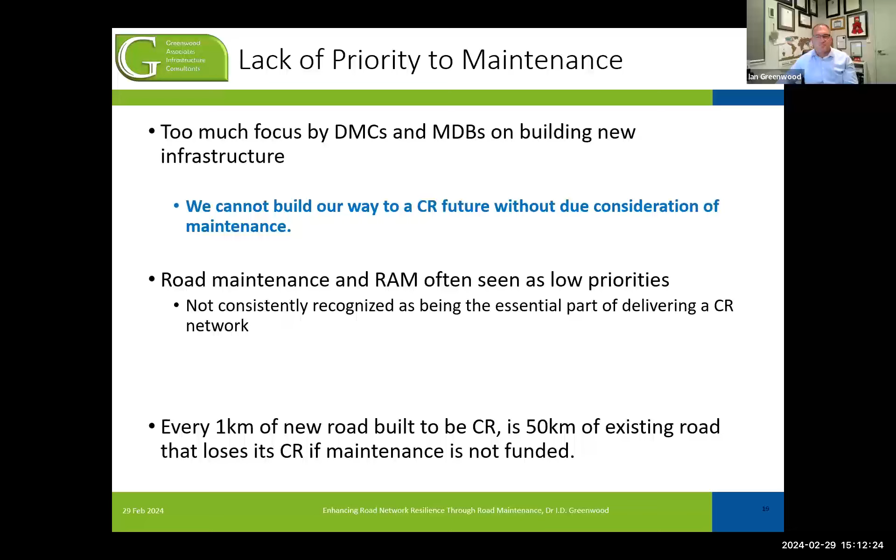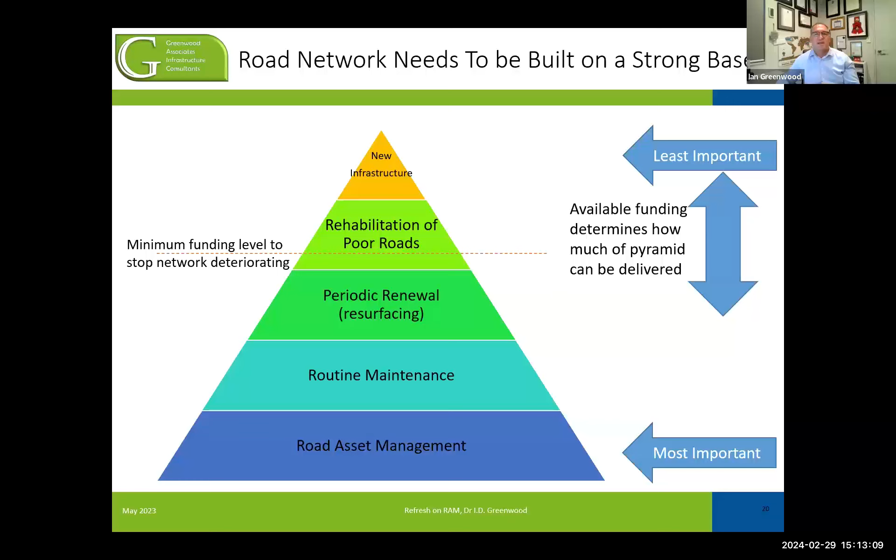We then need to make sure we're fully funding the routine maintenance, the periodic renewal funds. If we come up short in money, it should be the new infrastructure that we give up. But instead, most countries work in reverse—they say we want to spend all the money on new stuff we wish to build, we'll then do some rehabilitation, and by the time we get to maintenance and asset management, often there's no money, or so little money as to be ineffective.

So the simple rule: if it's worth spending $100 to build, it's probably worth $2 a year to look after it. We need that idea, and we need to get our high priority activities right. If you're in a rainy area, make sure we're focusing on cleaning the drains, shaping shoulders correctly so water runs to the drains, repairing potholes before the rainy season, doing crack sealing before the rainy season. If it's an unpaved network, grading and keeping on top of the resurfacing program.

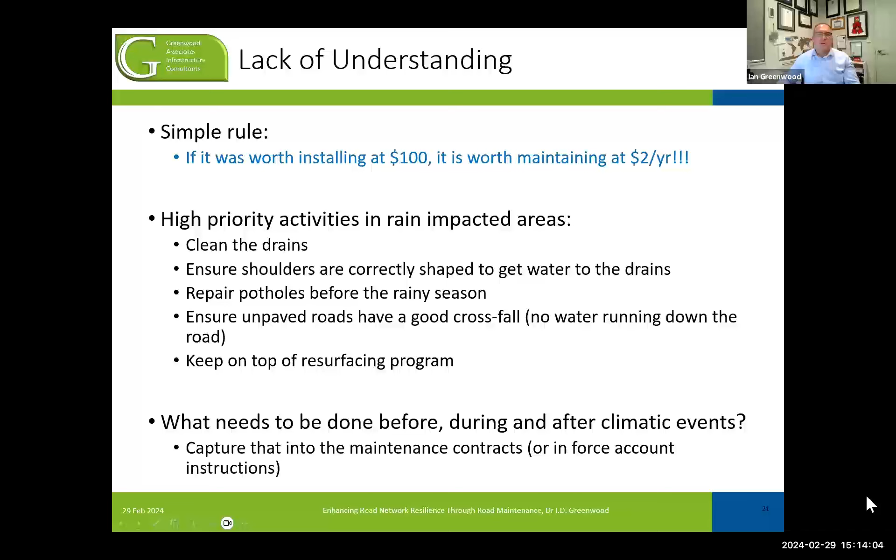As Alki said, planning what you're going to do before, during, and after these events is essential if we're going to create a resilient society, because a resilient road is only part of it—it's the society we're trying to make resilient. So it's what can we do all the way through.

We also need to stop trying to justify projects on fictitious benefits. If we've got a project in a country where they don't do maintenance, it's fundamentally wrong to model and create benefits on the assumption that maintenance will occur. We see countries using HDM4 and similar tools where the model says this is how much benefit and how long the asset will last—but that assumes a really good maintenance regime, which we know doesn't occur. Perhaps we need to start saying: if a country is only funding 30% of the need, you only claim 30% of the benefit.

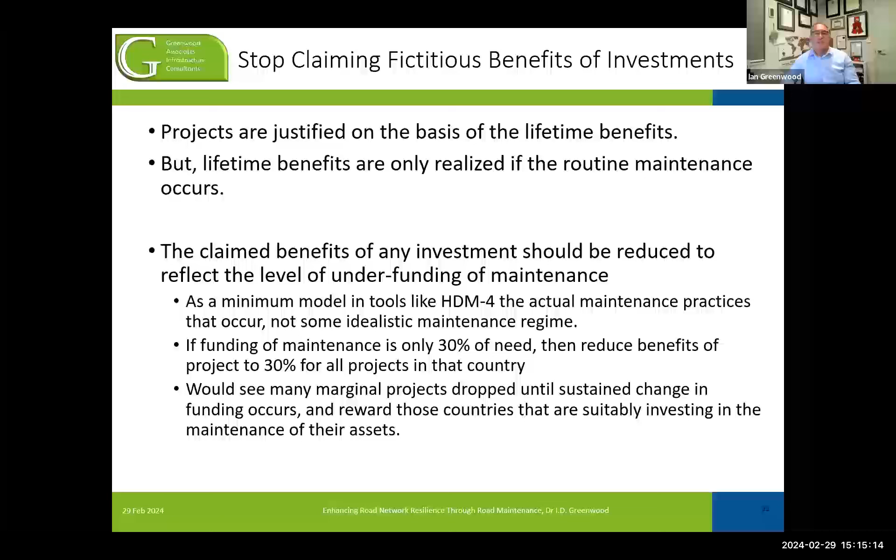That would start saying the countries who are actually spending the money on maintenance would be the ones who get the highest priority for doing more work. It might seem extreme, but it's essentially what you should be doing now anyway, recognising that you can't claim benefits that were never actually going to be there.

In the interest of time, I'm going to flick over this quite quickly, just so we've got more time for Q&A.

When we see it in a developing country context, when we outsource, yes we do some of the asset management functions, that's all good, often not particularly well. So if we're talking about the typical OPBRC or OPRC model, emergency response is consistently weak.

There's this whole view that the public sector, the force account, needs to be doing emergency response. But what Alki has shown, and it's been shown time and time again all over the world, is that the private sector is just as capable of responding to an emergency, and they care just as much as the public sector does. So I think now we do need to get a lot better in that emergency response area across all of our contracts, to make sure when these emergencies hit, we can deal with them.

We had this issue in one of the Pacific nations. There was a cyclone that had gone through, and when they went to talk to their contractor, because there was no requirement to do emergency response, the contractor had already taken on private contracts to go and do other stuff. So we need to make sure we've got that covered.

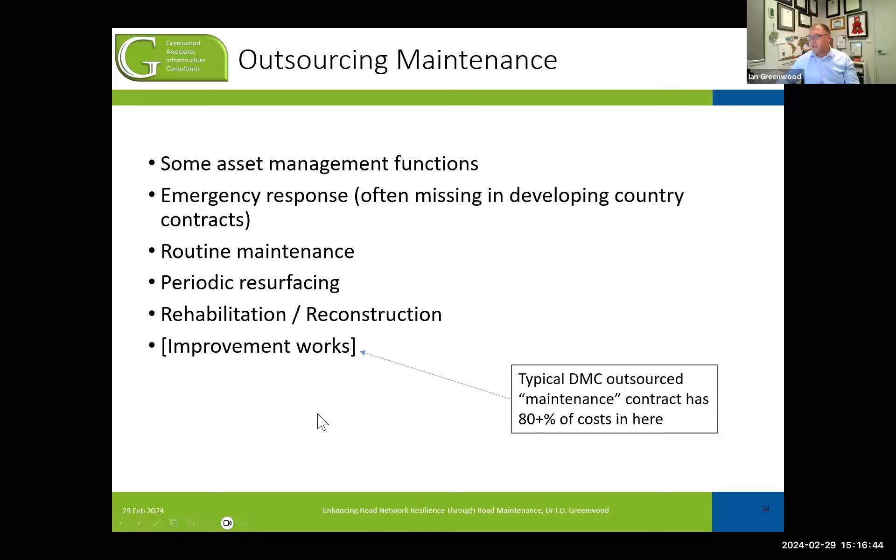Picking models, there is a process to go through to make sure we get the right sort of contract model out of this. And as Tian said, a real key part of outsourcing, whether you do maintenance-only contracts or long-term toll roads, is understanding risk and how you share it, and how you incentivize a contractor to make sure they're staying on top of those climate resilient critical activities.

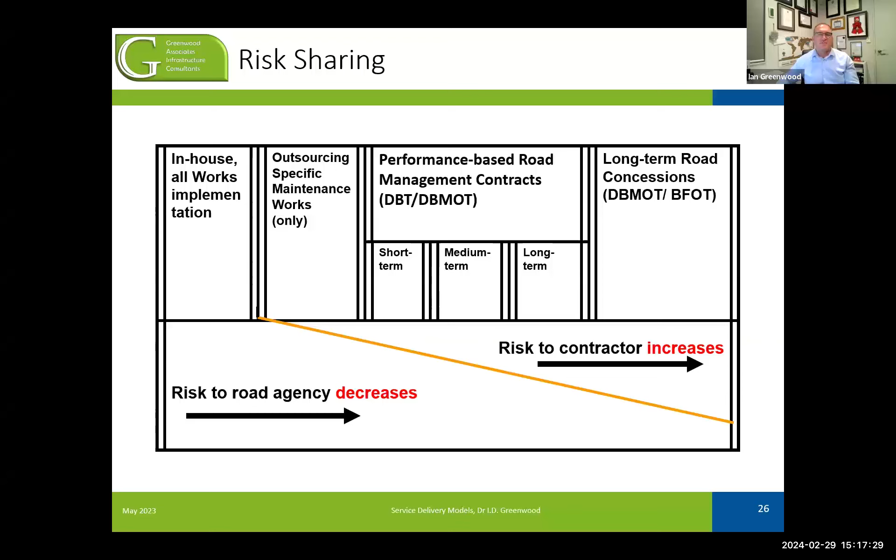And as Tian said, if a bridge or culvert is not being cleaned and it washes out, it's only right the contractor should pay to put it back in. So it's how we deal with those things to make sure the network is really being looked after, particularly at the right time of the year.

So in summary, what I want to get through here, and then we'll get to some Q&A for a few minutes, is that the number one thing you can do for your network is routine maintenance. No matter how important or high priority you look at upgrades, I can pretty much guarantee if you did the numbers, routine maintenance will win hands down.

When we looked at this in the UK a number of years back, I think the routine maintenance economic return was 16 times that of doing a capital upgrade project. It absolutely dominates. So we cannot build our way out to a climate resilient future without maintenance.

The idea that we are going to do more and more upgrades, as Jamie said at the start and has been emphasised by others - it's maintenance which actually delivers us a climate resilient future. We go there once, we do all these improvements, and that might be it for the next 20, 30, 40 years. In between, it is maintenance that delivers, from day one through to the end of year 50 or whatever that happens to be.

For most countries, we know it's not a lack of funding that's the issue - it's not even a lack of funding in the road sector. For most countries, it's a lack of prioritisation of those funds into the area that would do the most good. And yes, we've got to consider safety and all the other factors going on, but when we look at it, typically they all come out together.

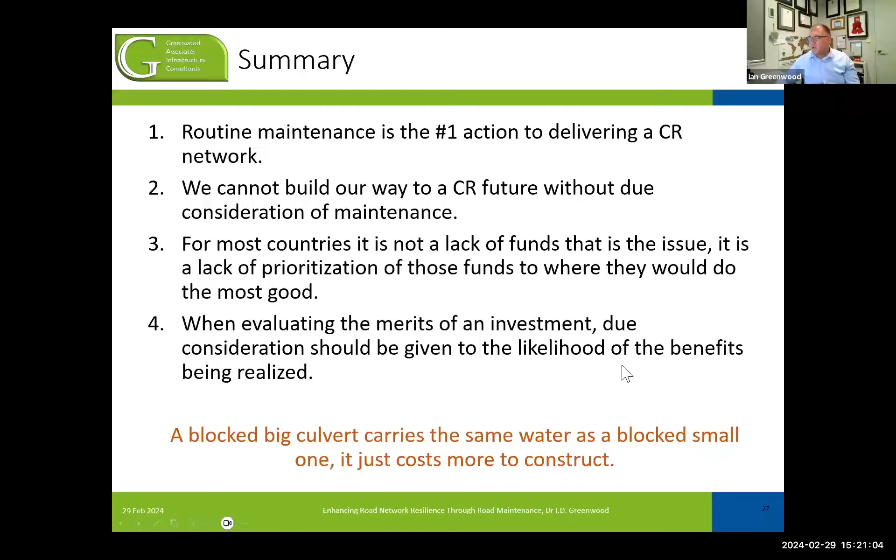Correct, Ian. I would like to say something about concrete roads. As I've indicated, through a UK project, the new Road Note 31 covers quite a bit of climate consideration in design, so you can certainly have a look at that. The person that asked the question has rightfully noted the value of using concrete roads in sensitive areas, and I fully support that. In the old days, we only built them for very busy roads, but I think it's also a very effective climate mitigation option.

Something else I do encourage you to look at, which is also in Road Note 31, is the increasing use of epoxy additives to bitumen, both in asphalts and in chip seals. Because that gives you a more robust seal, and it's also not so sensitive to hot climates or very cold climates. So also look at that option. Thank you.